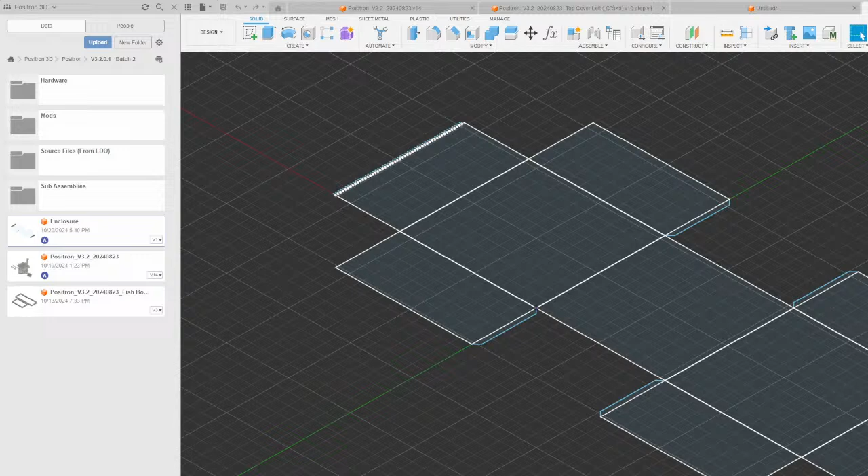I'm down in the corner! Ah, fear me! Alright, let me add a source here. No, we're not gonna do display capture. What do I want? You'd think I would have done this. Window capture, there we go. Alright, yeah, I'll just leave it as window capture. We're going to capture Fusion 360. There we go, hello, let's bring you down a bit, just above video games, there we go. Let's squeeze you down. There we go. All right. I think that fits, there we go. Yeah, there we go. Now you can see a few things here. I don't have the fancy border that I do when I'm on. We'll just offset it here. Yeah, we'll just offset it. Boom, right there. That way your chat isn't just covering up half of the screen. Someone give Nomad caffeine, did I yawn? I think we're good, oh someone gave Nomad caffeine. Okay, you need to make a Stranger Things upside down theme Positron, right? Negatron, I have it printing right side up. How is it possible that Nomad has gotten smaller? If you get much smaller, you'll be the size of an actual Positron.

Who knows? Alright, so here is something I've been working on - this is kind of an enclosure idea right now. I believe these are all equal sides, but for whatever reason, my brain is seeing this as a rectangle, not a square.

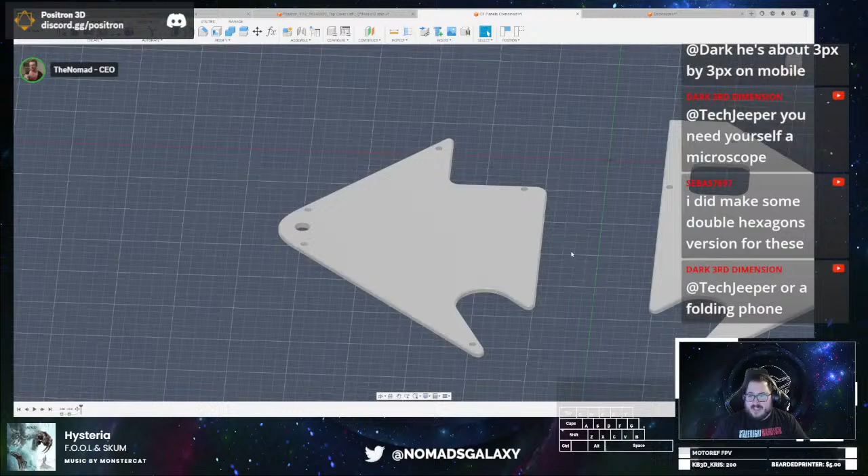Okay, so here's the challenge: we're going to have to actually design this upside down, because the way I'm thinking of doing this is printed like this onto, hopefully, a carbon fiber panel, so I can embed the carbon fiber texture. And then we're going to extrude the sigils into these materials here.

So let me look up a hex glyph generator—there's a generator for generating glyphs. Okay, that's pretty cool, but those are like really... oh, okay, hold on, we got some cool ones here. But not feeling it.

Glyph generator—nope. Magic spell generator—nope, that's an AI thing. I want something that... magic symbol generator, did I find it? By Psychic Science, hold on. I mean, that is kind of cool. Kind of. Ooh, found it, found it.

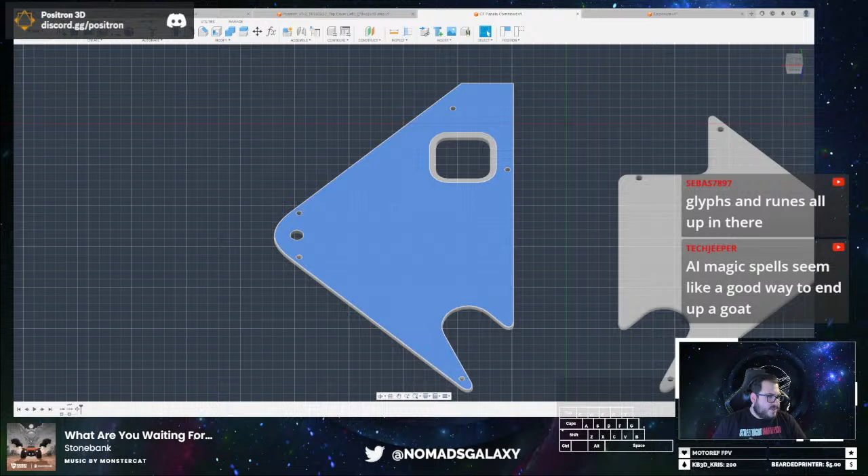Okay, so let me open up another browser capture here. Yeah, window capture, add a new one. And then, here we go. All right.

So I will post a link to what we're using here in just a second—this is a free tool that I just found. But it looks like... oh yeah, look at that guys, that is right up our alley. Oh yeah, some of these are fancy. I'm going to put this right underneath my face here.

Right? Something like the new God of War games. Now here's the problem—I don't know if I can export these. So we're literally going to have to take inspiration from these and redraw them. I'm fine with that. Additionally, I could look up...

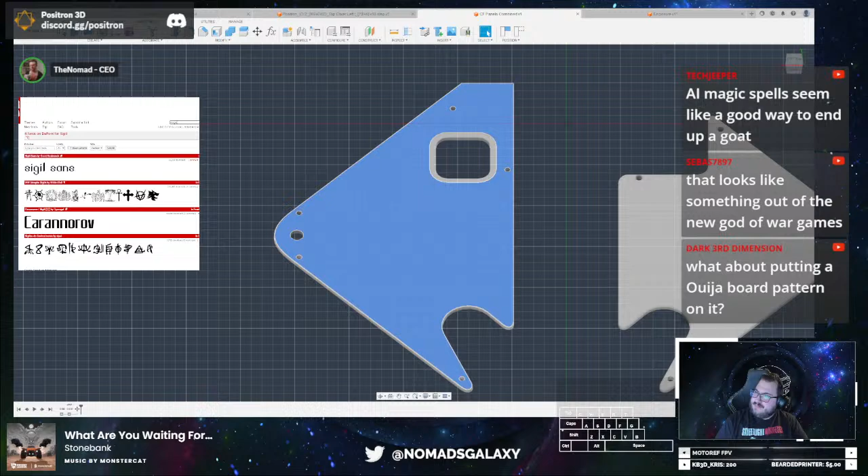So if we go to font, we can just search for like sigil—no, ooh. Oh, we searched up magic. Ha, some Halloween imagery. Okay, that's something else we could do, certainly.

Nah, that's a little too occult. So here's the thing: Ouija is not an occult thing, it's actually made by Hasbro. It's a board game—joke's on you, it's always been a board game. It was literally made during, like, I think it was made during the D&D scare.

These are absolutely some images that we could easily create with Fusion. Some of the really squiggly bits, probably not, but ones like this, oh, that'd be so easy to make.

So, oh, export as SVG! Holy shit! Okay, look at that. We can, ooh, hold up.

Okay, so we want this to be 0, yep. We want the sigil to be FFFFFF. Apply that. Okay, no glow. We want this to be... wait, why is it red? I don't understand how it became red.

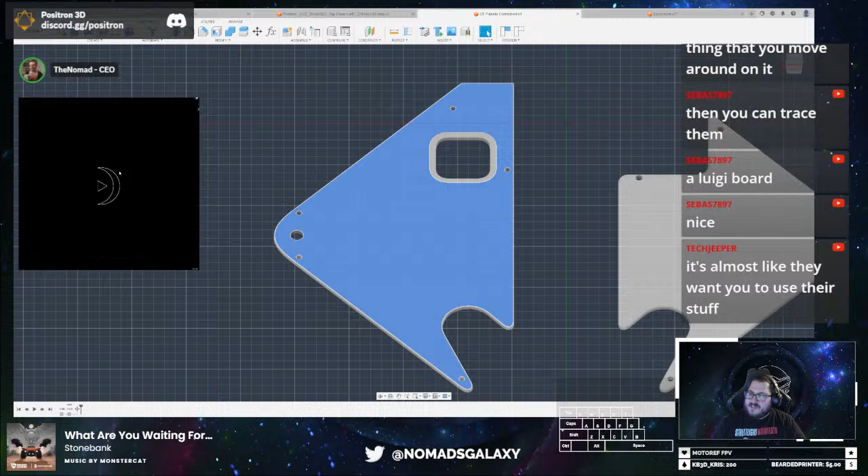So we're going to import this SVG. I'm worried... whoa, that's fancy. Okay, let's export this as SVG.

Let's clean up all of my downloads there. Okay, so let's see. Hey, Hedgehog, welcome! We are doing some fancy stuff here.

Okay, so let's do this. First, we need to make sure we capture design history. Is it already... yep, okay, cool. Already capturing design history, wonderful.

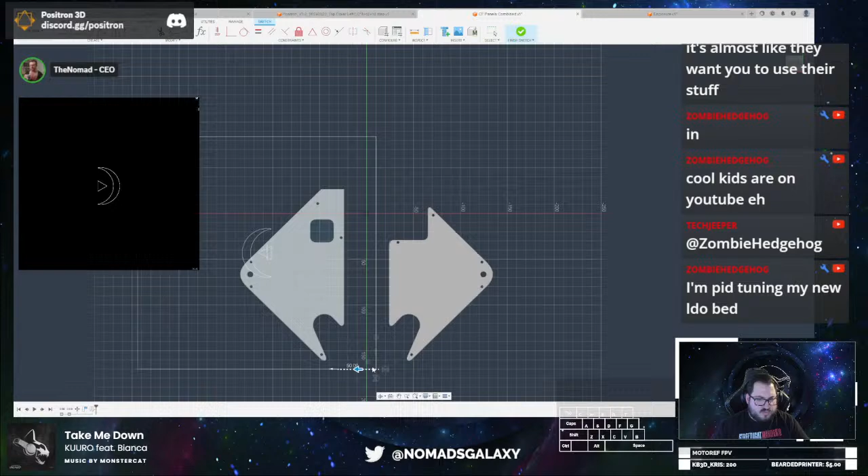Okay, let's see, I think we're going to scale it to 0.5. Yeah, there we go. Okay, that's scale. Oh no, I undid the import.

You guys are gonna learn really quickly, I am not good at Fusion. Like, I do things wrong.

Okay, here's what I'm thinking. I'm thinking 0.75. Oh, nope, didn't mean to actually import that just yet.

Had it a few days, but haven't had a chance to try it. I am excited to see what you do with it. I've been able to print ABS ASA on it without any issues myself, so I'm really excited to see what other people do.

All right, this is going to be a little close to the edge here. Okay, so let's make sure that's as centered as we want it to be. Let's bump it up 1.2. Yeah, right there. Okay.

Can barely see that. If we swap our environment, do you think we'll be able to see that better? Oh yeah, absolutely. We're going to go with Tranquility Blue for now.

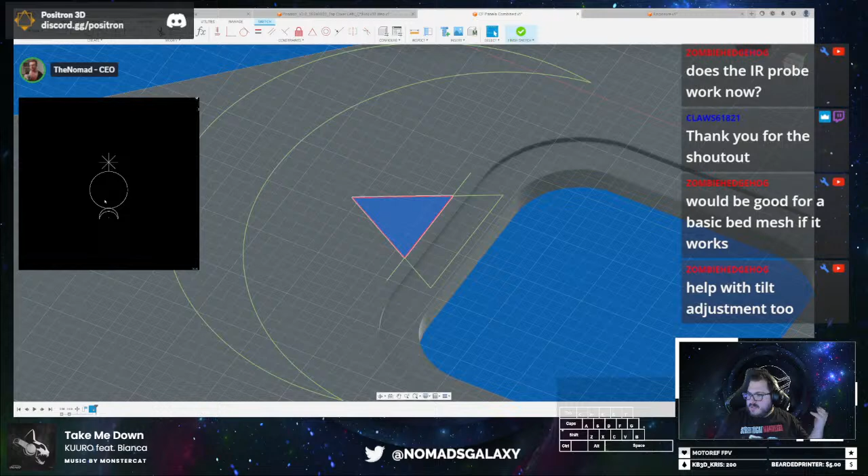Okay, so here's my idea: either we do the outline of the sigils, or do we fill the sigils? What do you guys think? I think we're gonna have to do outline, because some of these are like this with lines. Yeah, so we're just gonna do outline.

So let's select that, and then we're gonna do, I want to say, an offset of negative. Let's try 0.5. 7.5? Yeah, that's gonna be thick enough.

I like that. Outline might not glow enough. You're right, but I also just have a general... let's do an outline of 1 mil, I think that's gonna work, because this stuff is pretty bright when it glows. Like, it is bright.

Oh, that one's off. There we go.

Okay, that's our first sigil. I think that's going to look really cool right next to the IR sensor. So now we need something to accompany it.

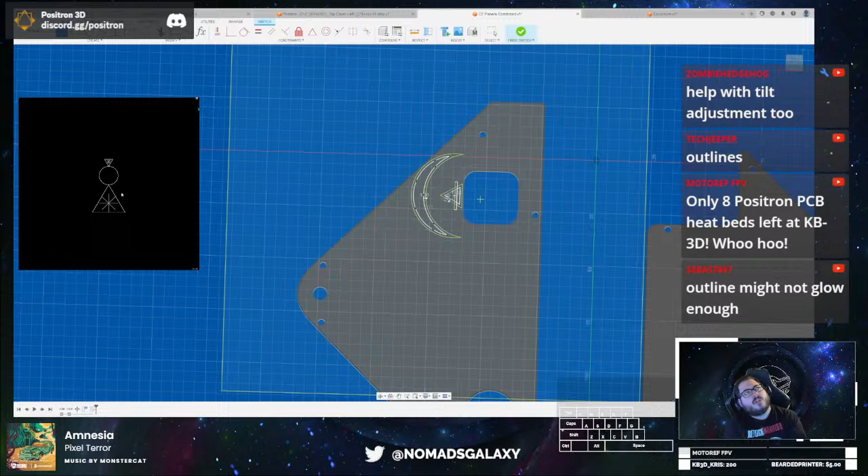Yeah, Zombie, you're right, it would help with a basic bed mesh and tilt adjustment. I mentioned it earlier, if you're in an environment near windows and stuff, it's not going to work great because of the infrared pollution from the sun. But if you're in a space with very little IR interference, you should be fine. I don't see why it would be too much of a problem. But you do have to re-enable the IR sensor in the config to do that. I don't think we've turned it off, I think we've disabled it for use as the Z-stop, but it should still be referenced in code.

Some of these are interesting, but I'm not really feeling them.

Massive shout out to Watabo. Let me post this link in our chat - that's the link to the amazing program we're using here to generate some of these sigils. Absolutely amazing what this person has done.

Let's do more simple, no, let's do this. Chat, if you can find a really cool sigil generator that would be useful. My brain wants to use all the ones with moons in them, but I can't use too many moons.

Ooh, okay, let's use this one. Export as an SVG. All right, so insert SVG. Okay, that one's gonna look pretty cool.

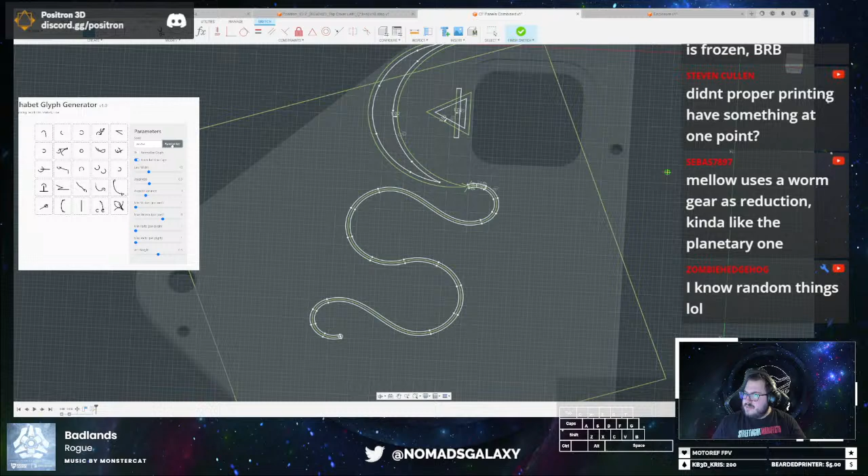Oh, hello, okay, can I export these? No? Aw, okay, line width, set to 10, let's randomize. A little too weird.

Hello, what if I hit start on this? Okay, it's doing a thing.

Welcome back, Claws, Mellow Cannon. Yes, that is what I said.

Does this just keep going forever? Hey, Nathan, what's up?

What? Hold on, it looks like no one can hear you. Give me a second. Let me pull up Discord here.

You probably will. Let's see, Discord PTB, go ahead and say something. Nope. Let me mute Monstercat here and turn on... Oh god, that's loud. I'm sorry for anyone who I just flashbanged their ears off.

I can hear you, it's in chat. Say something? Maybe your OBS is recording it weird? Well no, I'm on a different computer. Oh yeah, hold on, let me turn down Vivaldi a bit here. Okay, there we go, alright. Yep.

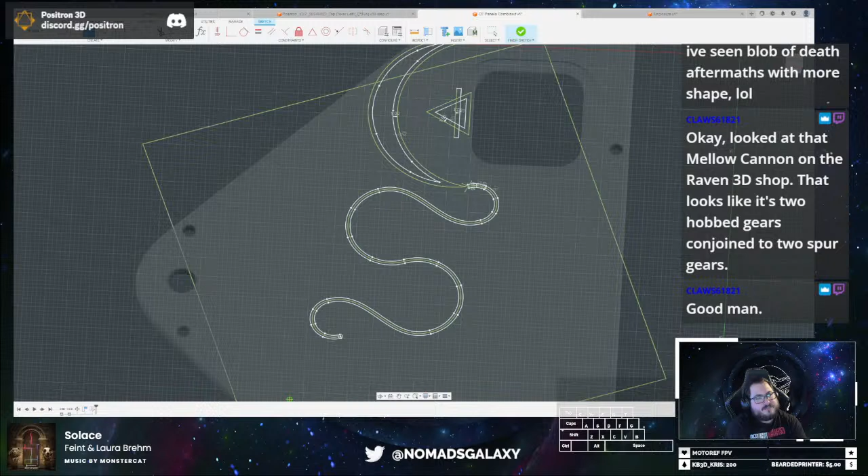Okay, looked at that mellow cannon on the Raven 3D shop. That looks like it's 2 hobbed gears conjoined to 2 spur gears. So you're thinking specifically a worm gear exclusively to push the filament itself? I don't think I've seen that. I don't see why it wouldn't work. I literally cannot think of why it wouldn't work.

It sounds decent. Why don't you use the image generator in Google Gemini? So I want something that's an SVG that I could just import, and if it doesn't do that, that's gonna be difficult.

I used to have one that was really good. Oh wait, here we go, hold on, I got another sigil generator. Is this... no, it's the same one we were just using.

Never mind. When the sheriffs were leaving, they said, if they come back tonight, you're going to use the flashlight, aren't you? And I said maybe. And he said, okay, next time we come out here, we'll wear the welding mask. Flashlight, oh yeah dude, they love it. Anytime somebody's missing or they have to look in the woods, they just stop by the house and I give it to them. But he said that when they come back, they'll wear their welding masks. I'm just sitting here like, that's not enough, guys.

Oh my god. AI-powered SVG generator, okay, I'm not... this doesn't feel great, but let's try it. Okay. Magic sigil.

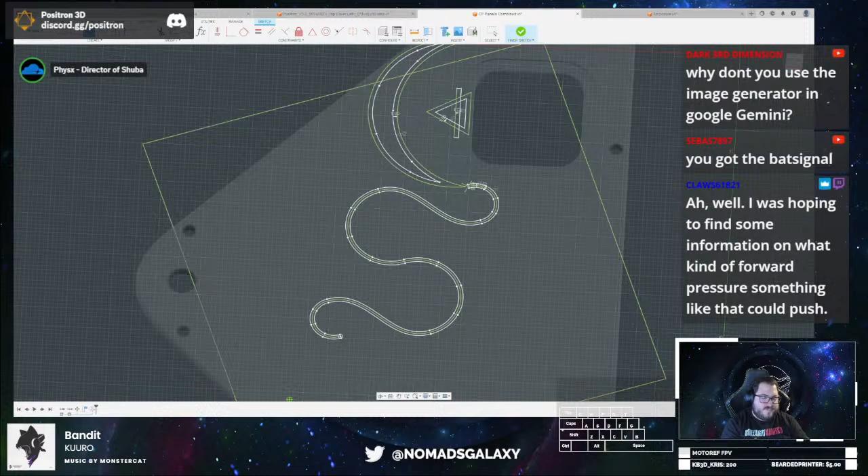For a little context about welding masks and the flashlight, I have a Shade 14 welding mask that is not auto-darkening. I can turn the flashlight on full power and walk around normally being able to see everything. A Shade 14, even in bright daylight, looking directly into the sun, looks like a little pinhole of light.

TechJeeper says, hey, we can hear. What can you hear? Can you hear me? Can you hear me now that I went famous on Twitter for one tweet? Never mind, I was like 5 minutes behind apparently. Oh, I used it up.

Man, it is difficult to find just like a generator that's not like... open an incognito window and do it again. Maybe. Okay, I still can't believe the single biggest tweet I have ever made was a meme from Facebook. No, we cannot hear you after you went famous on Twitter. Oh, Lord.

I calculated it out. Twitter pays like roughly $5 per 1,000 impressions on some topics. Whoa, really? Yeah, but that's for some topics with really big audiences. I would have got maybe a couple cents, and I would have ended up getting like $2.30 from this tweet. Now, if I could ever get famous enough where the income from paying for premium would pay for premium, I would do that, because then I'm not giving Elon any money. True, very true.

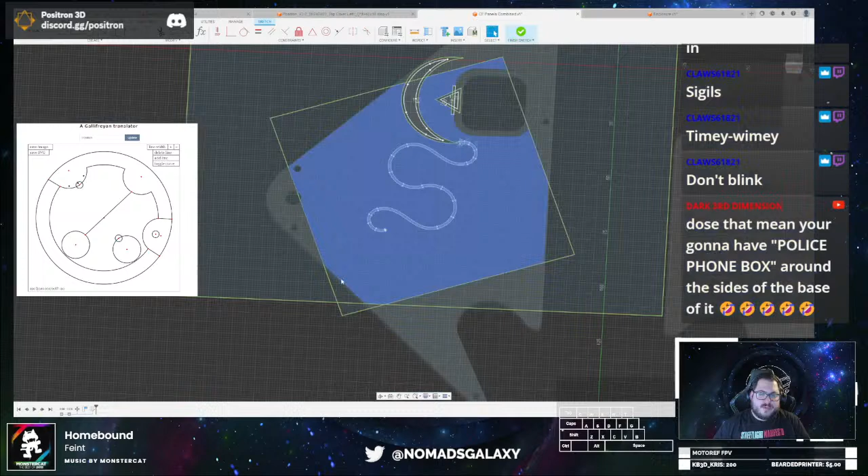CrashCtrls asks, what are you designing? Just joined in - we are designing. So let me zoom out a bit. So this - oh, did I just hit escape? Okay no, so these are top plates for a positron.

We are designing some glyphs and sigils to go on this, because what we're going to do is print this out of ABS and ASA, but the ABS that we're printing this out of is glow in the dark, so we're hoping it's going to shine through the panels when exposed to UV light. So that's what we're doing, chat.

What color of ASA are you going to have on top of the glow? Purple. By Polytech, are we going to do a Polymaker test print? No, it's actually going to be Midnight Meteorite from Ambrosia. I have no clue how transparent their filament is, but with ABS and ASA, some companies really crank up that pigment, and it could be...

I would say don't hope for the test print to be successful, because it probably won't be. I'm thinking like a 1-layer difference for the interface layer. Well, actually, what are you doing the layer on the outside for? It's just to make it look more purple. I would use adaptive layer height. So is it going to be on a top surface or on a wall?

Wall. You'll see, once I get this a little bit done. Alright, I think I'm just going to leave it kind of generated like this and not mess with it too much.

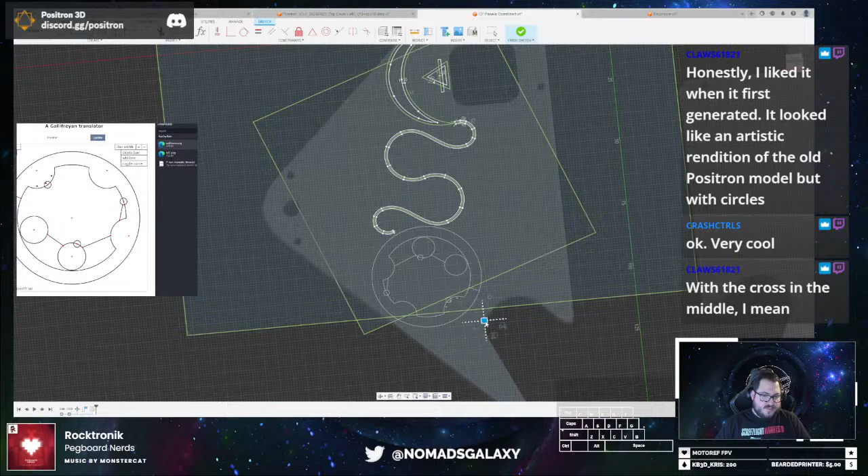Into Imalent Fusion. Imalent is coming out with a UV flashlight. Cool. And it's going to be 100,000 lumens of UV light. Oh my god, of course it is. If this doesn't work, we can charge it up with that.

Yeah, I sent the color pictures to the side chat. Oh, they're so good. If they offered this in ABS or ASA, I would do a Positron in it. It'd be called the Mocha-tron.

Honestly, I liked it when it first generated. It looked like an artistic rendition of the old Positron model, but with circles. Potentially, yeah. I'm still trying to figure out what I like about this. I'm very picky.

This is going to be difficult to do because this Gallifreyan uses a lot of lines. So being able to etch Gallifreyan correctly is going to be really difficult. So I'm going to be taking some liberties here.

Oh, that one didn't take. That's weird.

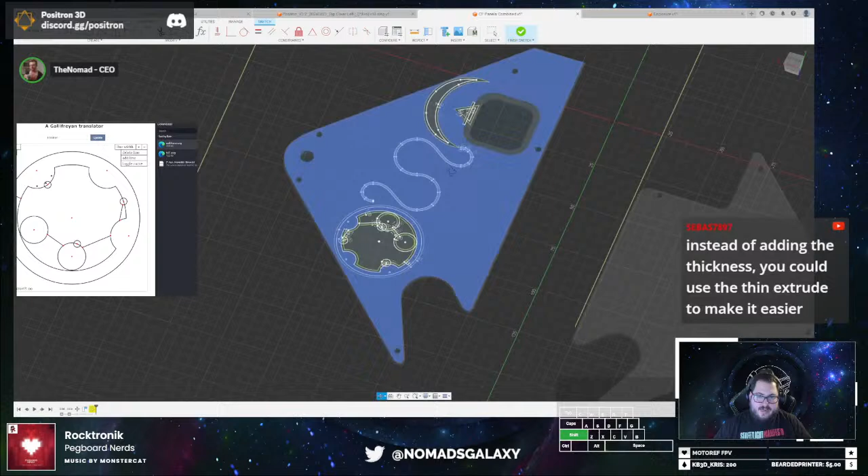Alright, I like that. I am liking that. I want to add some other sigils in here. So, like...

No, why is the Google image effect using a domain that just says Asian box? I'm sorry, what? Yeah... asianbox-pa.googleapis.com.

Oh, that is mana. That is not... that's Magic the Gathering symbols. I don't want a Magic the Gathering symbol.

I'm stupid, come on. I'm so stupid, Sigil. Nomad. What? I was reading it so wrong, it's weird, because I am slightly dyslexic, and it's AI Sandbox. Oh my god, 10 out of 10. Not Asian Motor Rev box.

Let's see what happens if I hit create sigil here.

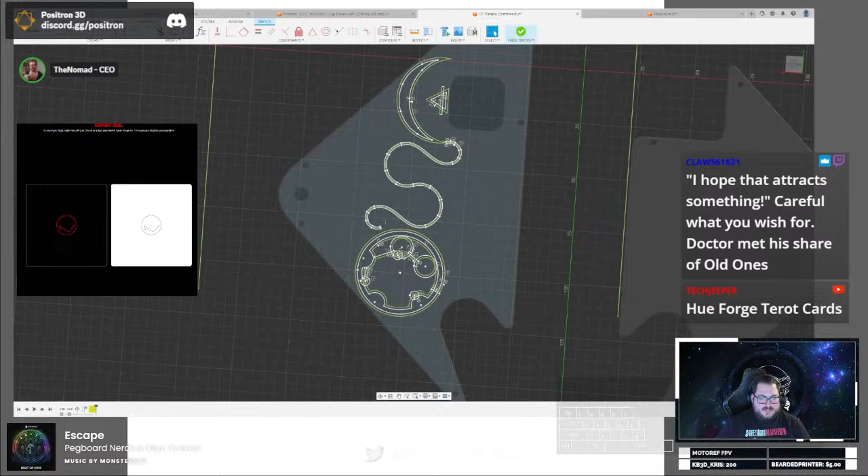And insert SVG. And it is a bit big, so we'll shrink it down. So we're gonna do 0.75. No, 0.5. No, it looks like we're gonna want to do 0.75.

Alright, and then let's create a new sigil. Let's do Nomad. This is a neat tool, I like this tool. Huh, HueForge Tarot cards would be pretty cool. Okay, Nomad is a simple shape, let's do something else, let's try Nomad's Galaxy.

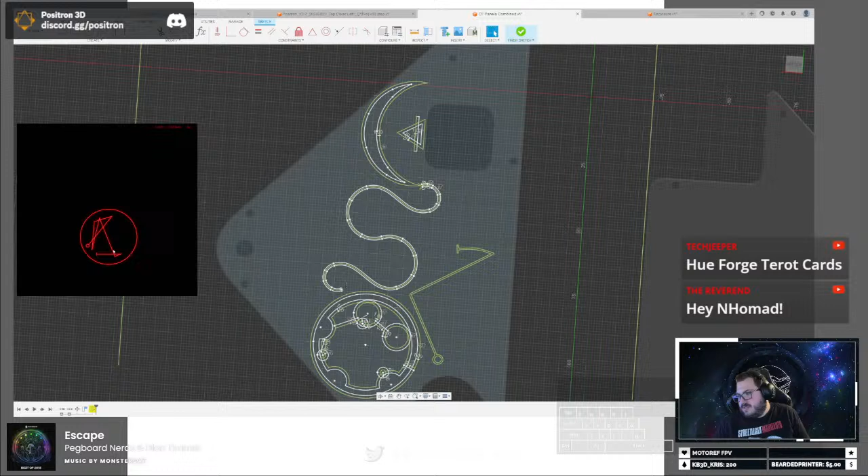Hey Reverend, welcome. And that's kind of complex. Let's try Nomad Gal. We're doing good, we're doing a fun little design stream today.

Okay, I like that one. But now let's try Nomad's Galaxy again. Nomad's Galaxy. You know what, I'm down with that one. I'm down with this one.

Alright, so same as before, save as, and then we're just going to replace the previous one. Then back into Illustrator. File, open recent file, download. No, not SVG. Open recent file, download PNG.

Hit no. Nope, that's SVG again. Okay, there we go. So once again, we go image trace, and then we're gonna try sketch to art.

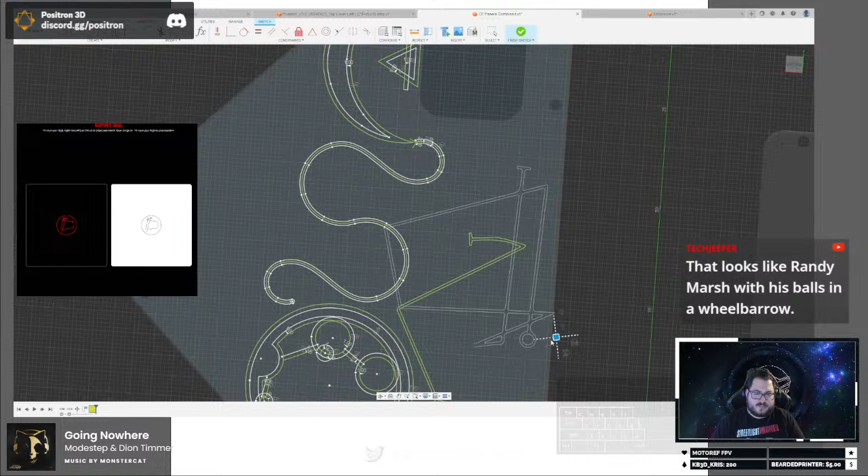I'm liking this, I'm liking the combination that we're going with here.

All right chat, who wants to be a sigil on this attempt at something pretty cool? Obviously only going to do this with you guys, with your permission. So who wants to become a sigil? We'll type your name into the generator and let's see what happens. Think you're gonna tap out for this?

All right, Claus, thank you for stopping in, thank you for the follow, I do appreciate that. All right, Dark Third Dimension, let's try your entire thing. Dark Third Dimension, let's see what happens here.

Ooh, okay, I like it, I like it. Let's do that one, that looks good. We'll get to someone next after this. I see a perfect spot for this sigil here.

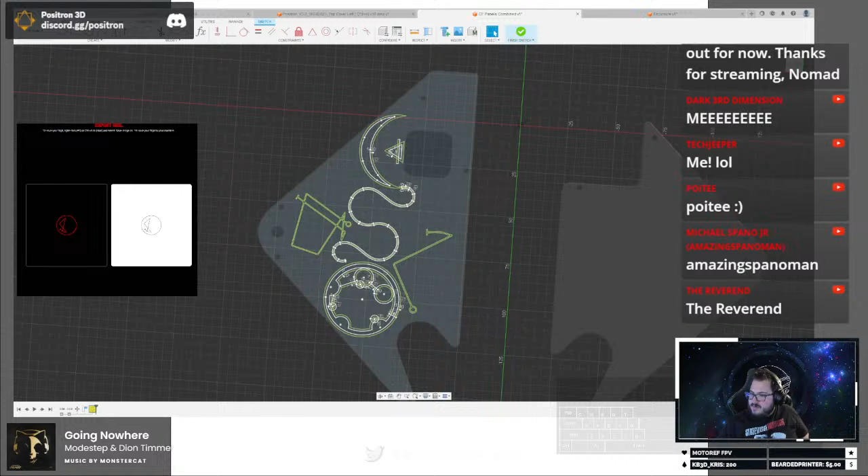I just need to close out the PNG in Illustrator. There we go, yep, replace it. And then we're going to open recent file, PNG. There we go.

Yeah, so if you have Adobe Illustrator, this is typically how you can actually make... actually, let's do line art, see what that does. Nope, don't like that one. All right, image trace, sketch to art, high fidelity.

So this is actually how you can... what's it called... generate stuff. Wait, is the game stream actually capturing this? Yeah, it is, okay.

It was, at least for a moment there, actually capturing it as a game. That's kind of cool.

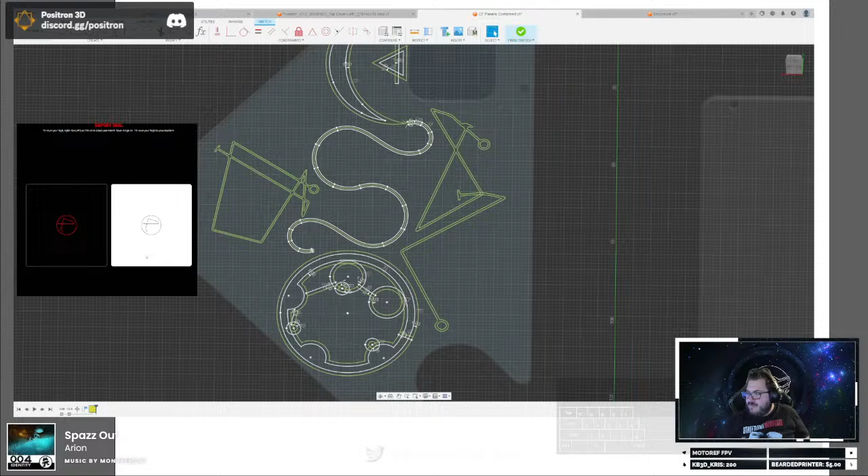All right, let me close out, download a PNG here. Yes, file, open recent file, PNG.

Let's see what that generates. Oh, I forgot to expand. Dude.

All right, export. Actually, before we do that one, I want to try a longer name of my own pick real quick. Yeah, we're designing this not knowing at all if this is going to work, but I trust my Prusa XL to do a good job on this.

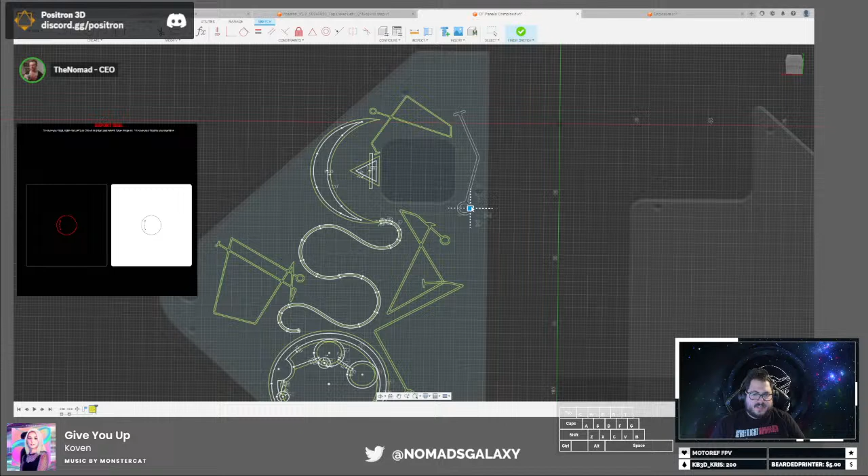Oh, that is not what I wanted. What happened here? Oh, I forgot to hit OK on the export. All right, insert SVG. So apparently this sigil means Voron, which I'm just going to shove right there. I feel like that's good.

Alright, let's generate a new one. Let's see. Fuck it, let's do my favorite band. See what happens. If you don't know, my favorite band is Streetlight Manifesto. We all know the truth, we all know it's Asking Alexandria. Okay, that is way too complicated. It's cool, but it would take up a lot of space. So let's try... Nope, oh god no no no no.

Ska bands. The next sigil you do, you need to do one where it's just a bunch of random letters, like a cat walk on your keyboard. Yeah, I'm not a fan of the ska band sigil here. Then do the cat keyboard sigil. There you go. Oh god, this is gonna be massive. Or not. Yeah, that's just a squiggle. What can you expect from a cat on a keyboard? Right, okay let's see what else. You're expecting too highly of a cat on a keyboard.

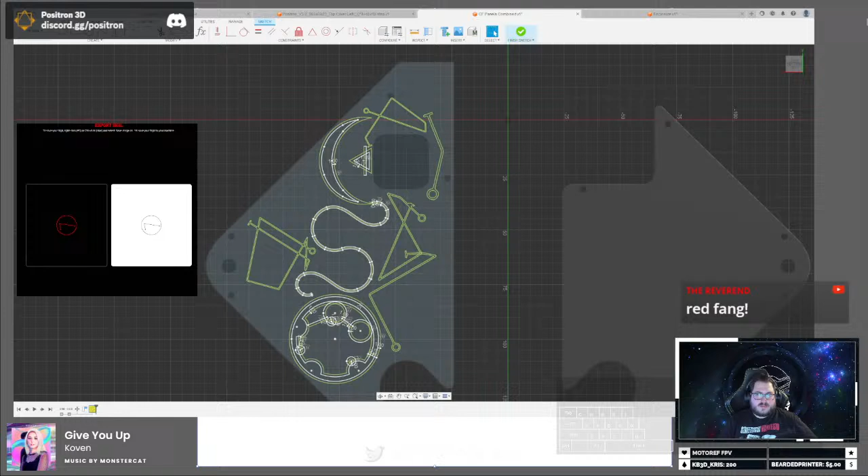Alright, then we're going to image trace, sketch to art, expand, delete the circle, okay, and then export as, download the SVG, yes. Okay, alright, this, we'll do one more after this to kind of fill up that void in that bottom right section.

This one's a bit larger than I thought it would be, but it fits right there. Okay, there we go.

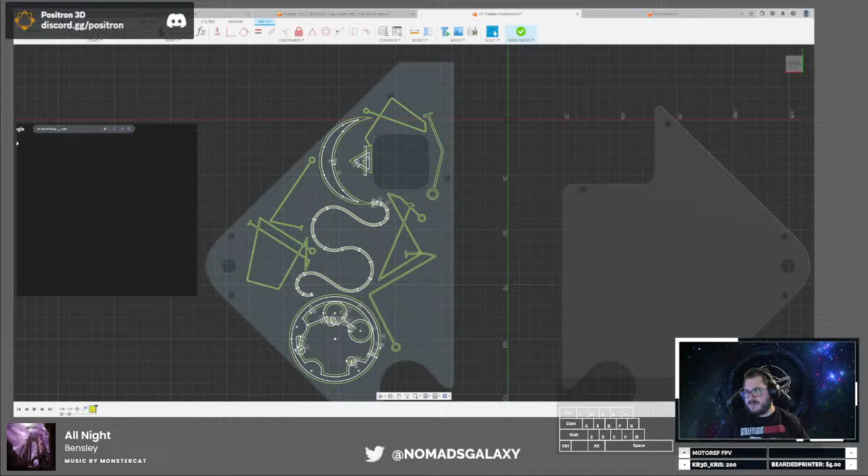Oh no, did I really just think of that? Yeah, I did. What did you do? You broke something, didn't you? One second.

Alright, copy image. I think chat knows what I'm doing here.

Oh! I look back at my computer and I see it. No, guys, it's great, it's funny. Alright, copy, good, alright, let's see if this works.

We're gonna turn that off, just gonna dump it in here. Yeah, okay cool, cool, it grabbed it. Cool. Alright, properties, image trace, sketch art. It worked perfectly. Expand. We're gonna delete that.

Okay, I guess we're doing sigils now. I guess we're doing sigils now. I guess we're doing line arts now.

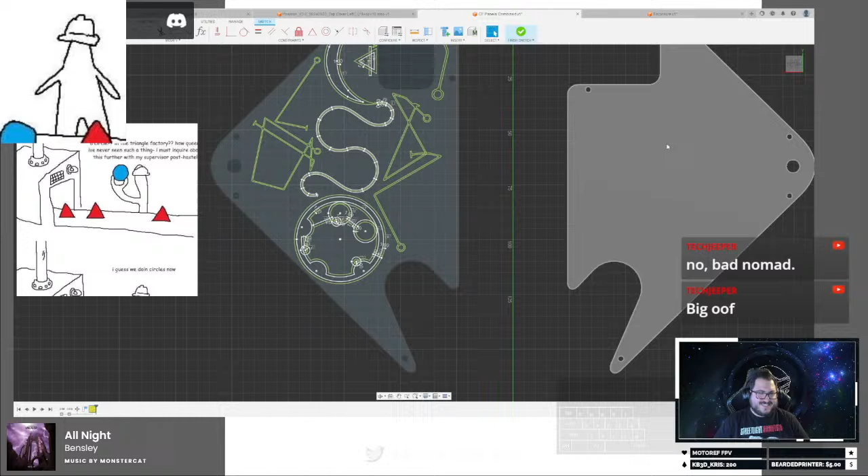Oh my god, oh my god, oh my god. Chat. Chat. It fits, it fits chat, it fits. Oh my god, it fits. Oh no.

Alright, I feel like we need maybe 2 more, like to fill this void here and maybe down here. That's what I'm thinking, maybe even up here. I'm trying to think of what to do. You know what, fuck it.

Someone already made it an SVG. These wonderful bastards. These wonderful, wonderful bastards.

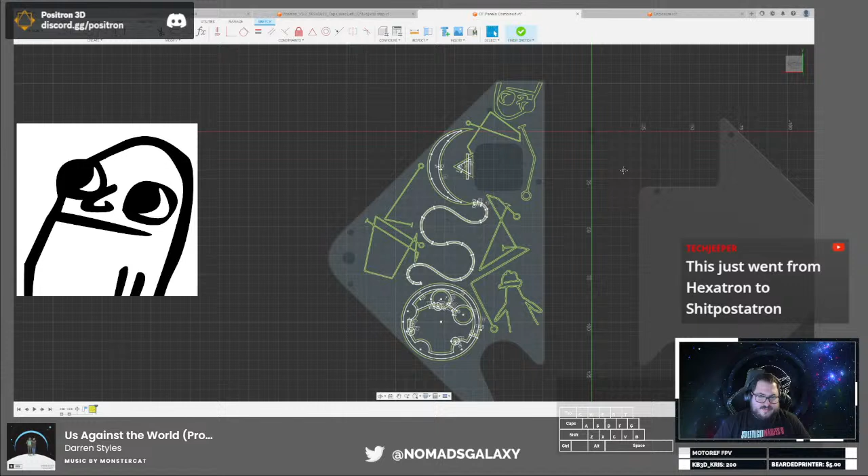I feel like this should now be called the Shitpostatron, because there's astral star gazing stuff in here, and then suddenly it's shit posting. And then, let's see - don't print on planes.

Oh, so you want to know something really funny about what happened with my sister? She came into my mini fridge in the garage and grabbed 2 Cokes out of it without asking me. And the 2 Cokes she grabbed were from the top freezer part, where I was getting them to chill down really quick and forgot about them. So when she opened them up in her car, they most likely exploded.

Sorry, my parents are smelling something smoking. No, they smell something burning.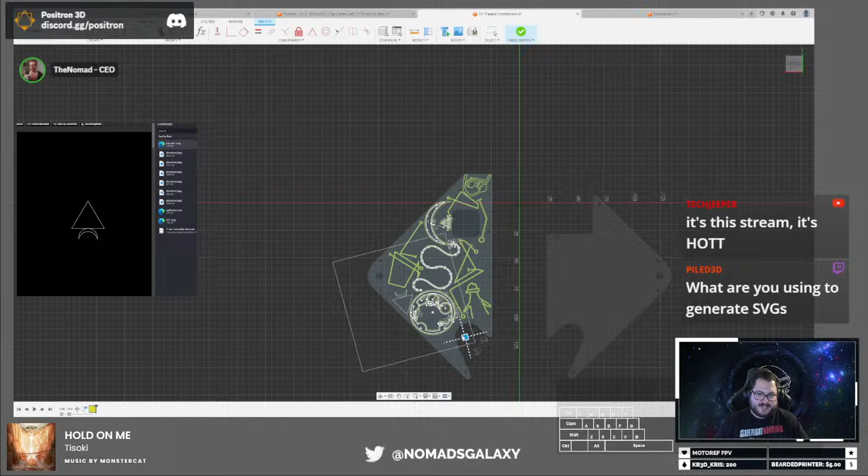What are you using to generate SVGs? I'm using Adobe Illustrator, that's what it's called, for image-based SVGs. For the sigil-based SVGs, it is this - I linked it earlier, but I'll link it again here. It is a sigil generator, and you can right-click and just export it as a sigil.

Do 0.5 on that, and then 1 on that. Resin is toxic - yes, yes it is, my friends.

Okay, let's finish the sketch and actually do some extruding here. Okay, so we want this to go... so let's start with dick butt, because that's going to be the easiest one for us to extrude real quick.

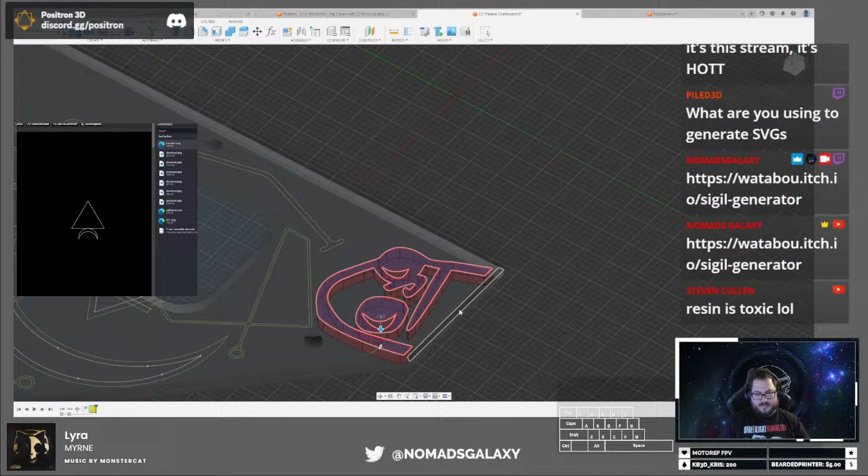So let's extrude that. Okay, so we need to do - since we're using a 0.4 nozzle, we're going to use 0.2 millimeter layer heights. So let's do this plus 0.2. And just like that, we've extruded the hollow portion of this.

But now here's the trick, right? We need to re-show that sketch and then re-extrude that. Now we hide the sketch, and then we do new body. So now it's 2 bodies in this mesh here.

And we're going to be pretty much doing that for the rest of these, because what that will let me do, once I import this into either Orca Slicer or Prusa Slicer, is set that object we just generated as its own color. So that will hopefully allow us to do what we want to do here. Pretty neat, huh?

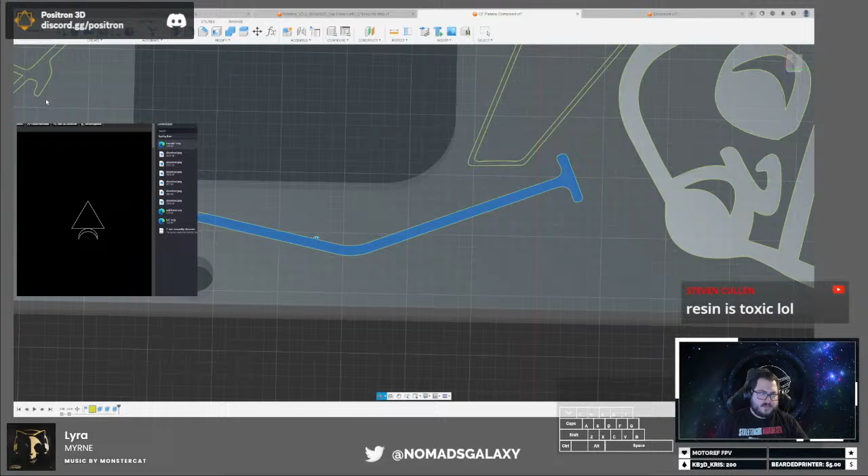Alright, now this one's going to be a little tricky, because I gotta do this in 2 different spots. So we extrude this down - yep, down to there - new body.

And then show that sketch again, so I gotta do this like 2-fold here. So we extrude that down, just like that. Now we're gonna hide that body so it's joined.

Now we're gonna go back to the sketch here and extrude back. Oop, nope, not there.

Just as a heads up, your stream may lag - you kind of just went all robotic-y. Yes. Oh, nope, we're good, alright, now you're back to normal. Yeah, what that was, it was my VoiceMeeter deciding to kill itself.

It didn't - YouTube and Twitch, it did not kill itself, it just took a nap permanently. Seppuku.

Okay, so this is going to be a very time-consuming process. Though, actually, hold on - I could definitely make this a lot easier on myself.

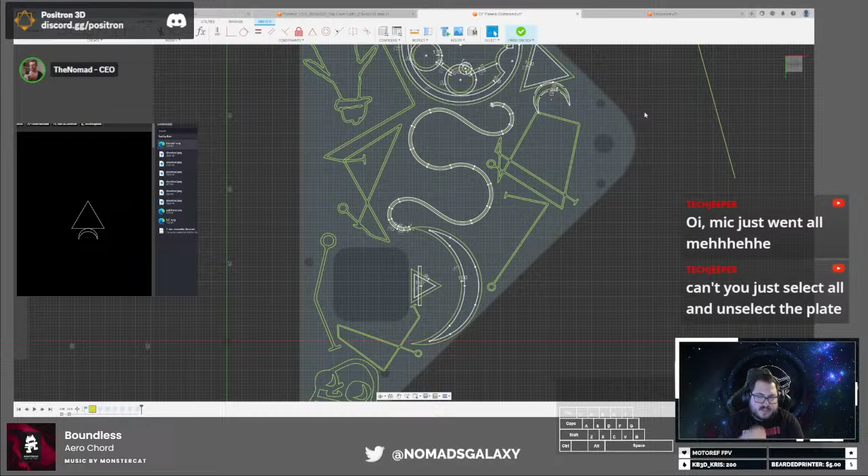No, I didn't know Prusa sold Raspberry Pies. Raspberry Pies? Pies, Raspberry Pies. And they have a Pi 4B and a Pi Zero.

Alright, so yeah, the downside to doing this is I have to go in and unselect the things that we don't want this to affect.

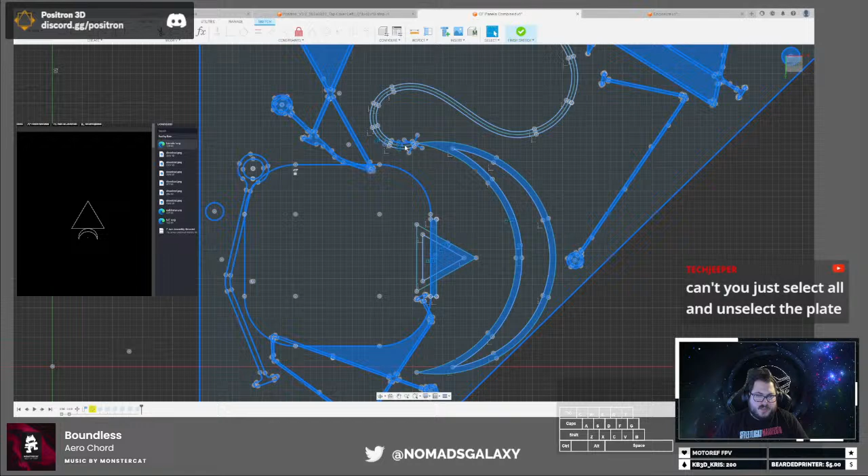And that can be a lot. I also have to unselect the ones I've already done. Oh, that path that we generated here, it's broken. That doesn't look good.

Before we go all in on this, I think what I'm going to do is export this small section, and we're going to see how well that prints. I think that's actually a smart idea if I do it that way. So we're going to just save this.

Oh, hey Lulu. Apparently Lulu's down here with us. Yeah, we're going to start with Dick Butt, and we're going to see how well that works, and then from there we'll figure out.

I am probably going to just send this canvas to some of my artist friends and be like, hey, I will pay you to draw a ton of magical glyphs on this. Take some of the fun mushrooms and get to work. Right?

Alright, save as mesh. Interesting.

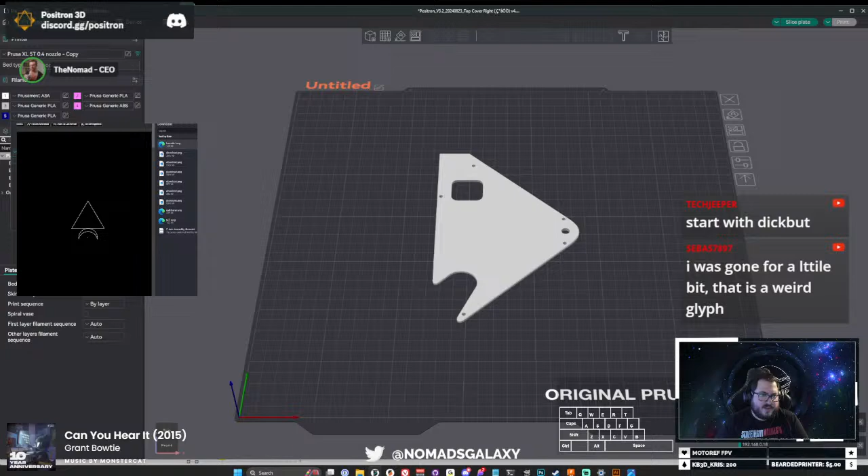Okay, now what we're going to do here is we are going to cut... no, don't. Okay. Cut. There we go. I'll just delete that for now.

Okay, looks like we need to assemble that. This is going to be a very quick print considering it's so tiny.

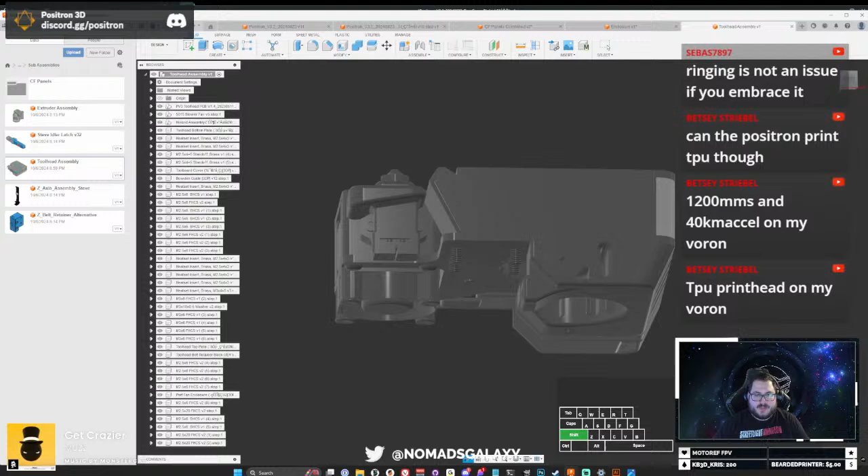Let's close out some of these. Go ahead and save. Yep. This is starting to lag my computer. Don't you just love it when it does that? Just freaks out. Come on. Oh, is it? Oh, it's responding. Okay. There we go. Still a little laggy, but this is fine.

Okay, so what we have to update here. So this is using the old fan duct, so we gotta install the new fan duct. So let's remove that, and let's remove that. Now what's neat is that the CAD already has half of the fan removed, which I just find hilarious. Okay, let's swap the environment here so we can see this a little bit better. That's certainly better.

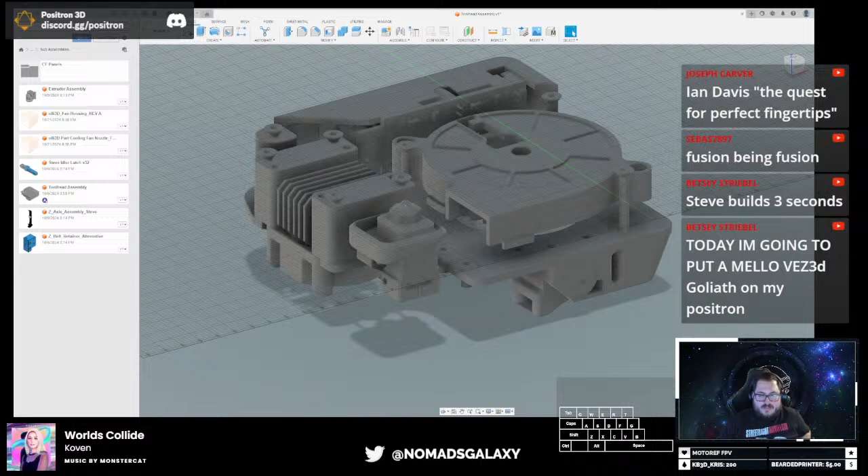Oh my god, what did you send me? Look at the picture, and then look at the comments. I saw both. Wish I hadn't. Alright, there we go.

So that is now imported, so let's bring this into the model. Okay, so here is what we're going to do. We should be able to line up one of these holes with one of the ones on the actual assembly. So that will snap this to that.

So we should be able to click assemble here. And then what we're going to do is on the bottom side, we're going to grab the center of that hole there. Oh, one second, my phone's going off. Okay, center of that hole there. Now we're going to go over to this assembly.

All right, Betsy, have a good night.

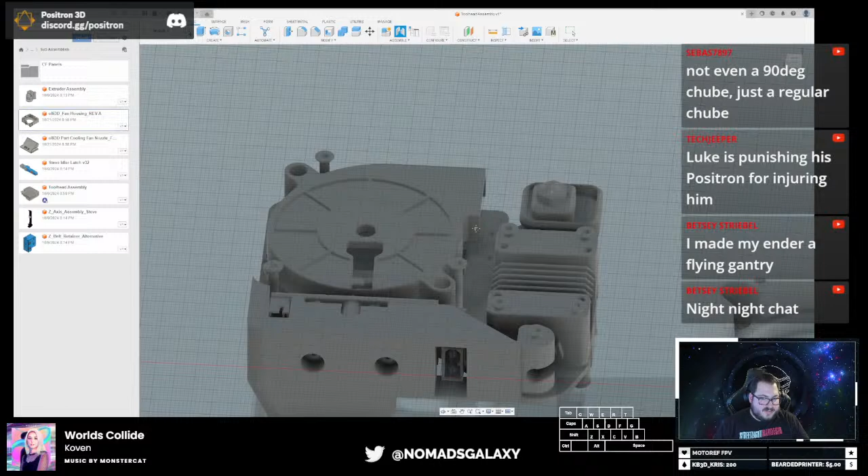We're going to do right there. And bam, perfect placement, absolutely no notes. That is exactly where it goes.

Now we bring in the fan duct. Now we got to rotate this to be correct. So rotate it 90 that way. And 90 that way. And now let's drag it over. Oh, did I? Oh yeah, that was way too far. There we go.

This is where you just need a good pair of VR goggles and like a couple of controllers. Honestly, yeah. Sadly, I don't have my goggles set up. Instead of dragging it 37 different ways with a mouse, you just grab it in space and yeet it to where you need it. Yeah, just clip it together like Lego.

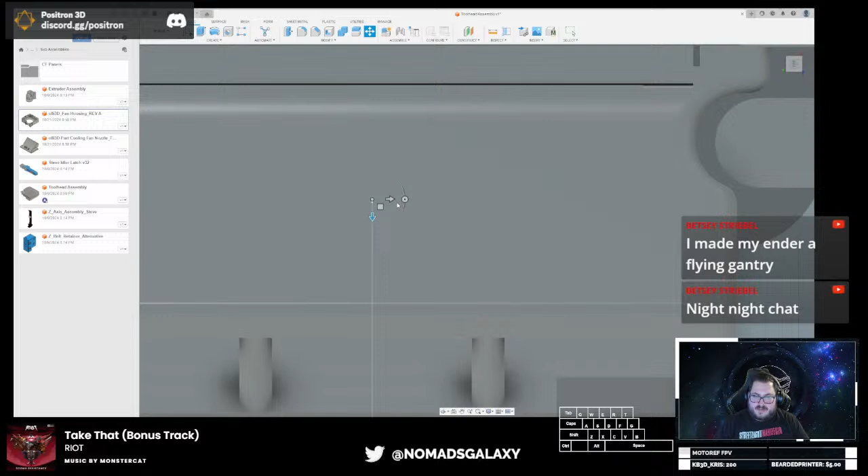Alright, that's close enough, I feel. Like doing a giant Positron build in VR where everything clicks together like Lego would be fun. Oh my god, it would be so fun.

That's a cool way to do a fan duct. Yeah, so the nice part about this design is that if we change the actual duct here, then we can actually just swap it out. So you don't have to redo this whole thing. I really like how Ollie did that because it's a pain in the ass to redo all that wiring. So if you could just pop this out and replace it, that makes everything so much easier.

But yeah, so now we just go ahead and put the top plate back on. Boom, we've just updated our tool head assembly, just like that. Yeah, and you could also do an accent. That's actually what we do.

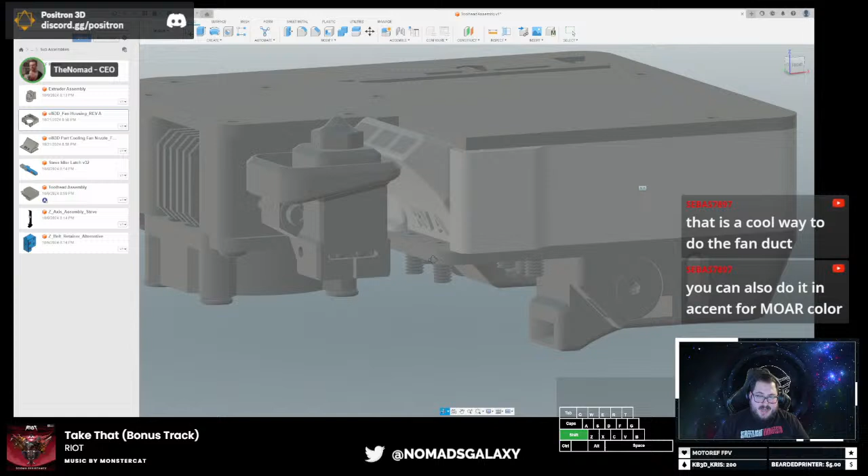All right, so chat, I have to do something here. I have to design a mount for, if we go back to Positron here. All right, so let's save this. Yep. So this is something I said that we'd do today. So I got to figure out how to get this to work.

All right, so I have to figure out some way to mount this that is somewhat dependable, potentially removable. I would like to be able to remove this when you don't need it. But we got to figure that out.

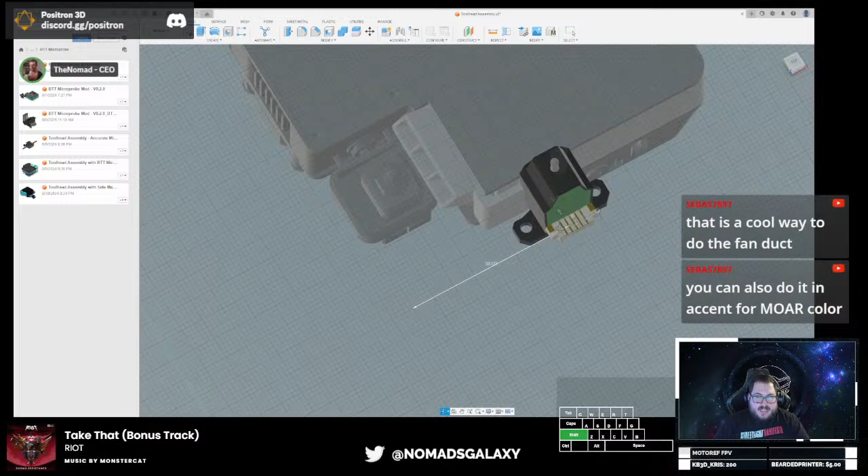The other challenge is that we need it to be as close to the nozzle as possible. I'm not sure how we're going to do that.

There is another design I did. In fact, let me see if I still have it here. So this was an earlier design I did, if it will load.

So this is an earlier design I did where we used magnets to just clip into place, just like that. And this worked. The only problem is printing this in ABS or ASA was near impossible. So I don't think I'm going to go with that design now, because it was just near impossible to print that out of ABS ASA in such a way that it wouldn't break.

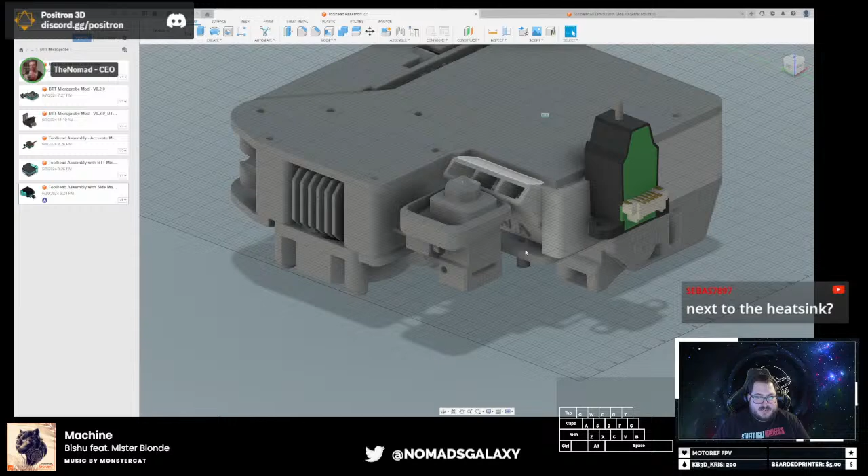Go back to here, I'm trying to think of a way. Actually... no, that's too small. Oh, actually, hold on. That's a whole millimeter right there. Damn, that right there is a whole millimeter in that gap.

You don't need a lot of strength to mount a microprobe. You only need something that can hold it there. It taps against the thing, and then you remove it. That's all you need. This does not need to be a permanent addition to the printer. It's 1 millimeter. What about just making a magnet then? We tried that.

Well, so here's the thing, Sebas. When we're talking about the positron, one whole millimeter is a big deal. Because let's pull up the actual CAD here, and I'll show you just how little tolerance we have on some parts.

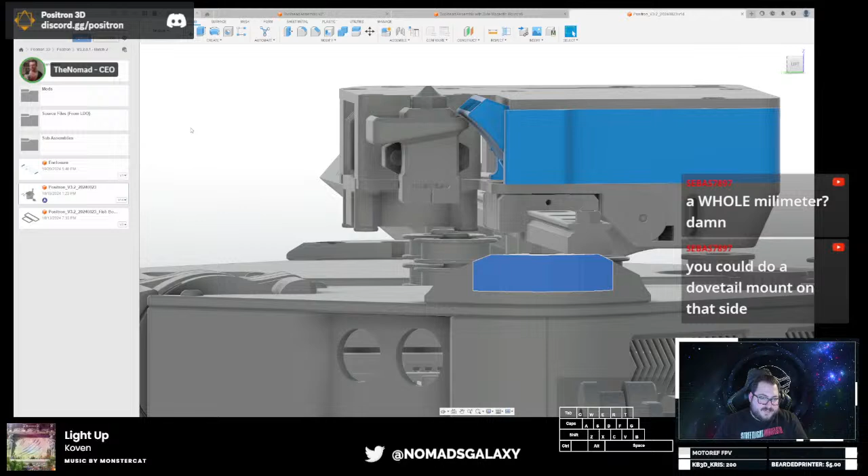Okay, see this? That is the side view of our assembly. I want you to guess how many millimeters are between those two screws. I want you to guess. Good, guess.

0.5? Okay, so we got a guess of 0.5. Chat, what do you think is the gap between those? 2.5? Okay, so we got 2.5. So someone's guessing 2.5 mil, someone's guessing 0.5 mil. About tree fitty, okay, so we got tree fitty. Dark Third Dimension says 0.25. Wow, this is a range. We are getting one hell of a range here. Very interesting.

If I had the CAD downloaded, I would literally go measure. Yeah, I know, but guess what? You don't, because you got it right. Oh, yeah, that is 0.5 millimeters of space between these two points.

0.5. When I tell you just how much tolerance the positron requires, it is insane that people are able to build these printers as reliably as they are, considering how little tolerance we have for mistakes.

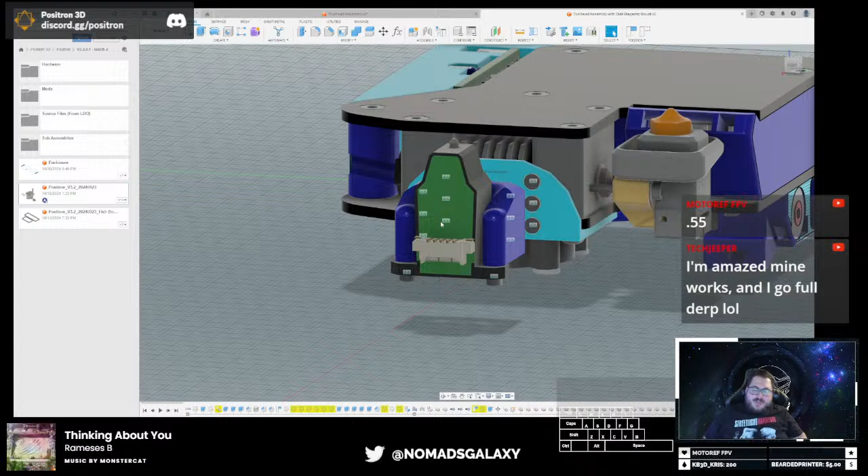So, if we go back to this model here, this original mount, this entire edge right there, that is 1.2 millimeters. That's all I had to work with in order to avoid collision with the extruder. 1.2 millimeters, that's all I had to work with. I could not go any larger.

These magnets here, these are the thinnest magnets I could find. It says a radius of 1.5, so it's a 1.5 radius. I'm trying to find the depth. Here we go, with a depth of 1. That's a 1 millimeter magnet. It's tiny.

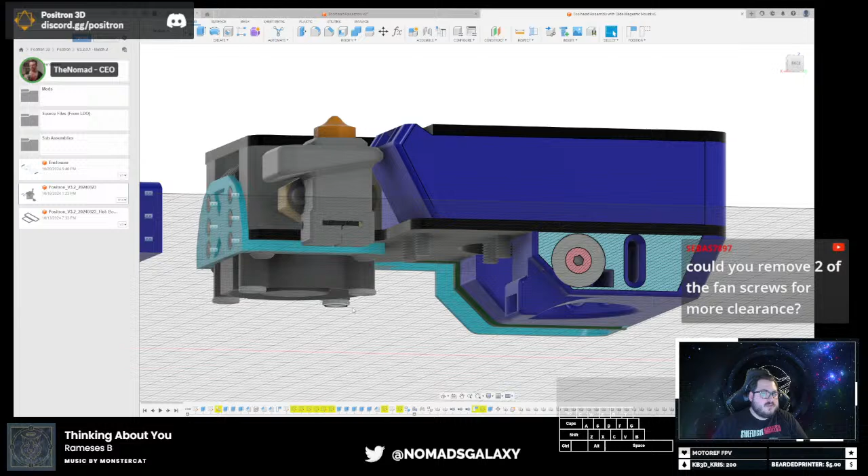It is microscopic. Could you remove 2 of the fan screws for more clearance? Yeah, you could technically remove those 2 fan screws for more clearance on the gantry, but then you also kind of risk it just dangling a bit if it's not mounted correctly. So there are choices you can make. One thing I recommend if these are ever colliding is remove one of the 0.5 mil washers, and then you get a whole 0.5 mil from the other screws.

So on this assembly, we have a whole millimeter right there. That's enough for us to make a little hook that just goes in there. That's certainly enough, but then we're not accounting for any clearance issues from shrinkage of this printed part. That's really hard to account for. But what we could do is a little clip mechanism that just cuts in here. So you know what, let's do this.

Let's do that. Let's get rid of that microprobe for right now. Okay, so let's look at this. This is not uniform down the entire length. Okay.

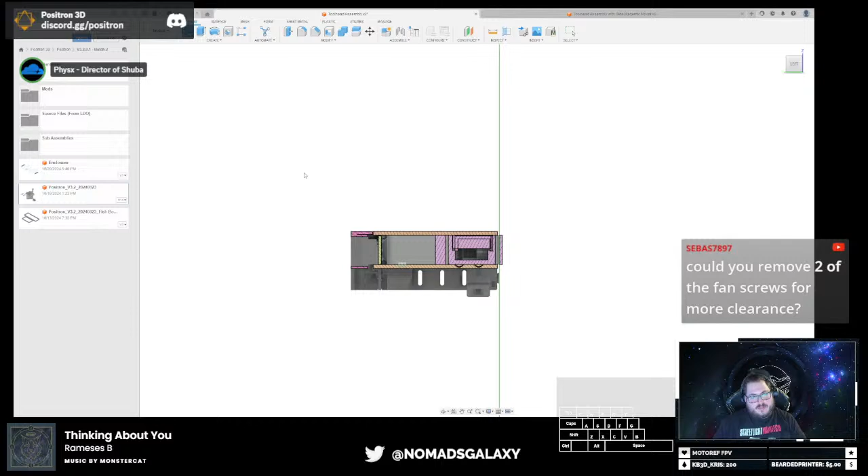Is there enough space inside the fan shroud to cut out a hole for a small hook to go into? Not really, because what I was thinking is if we could get it to hook in there, it really all needs to be stable left and right and down so it doesn't fall out. We don't have to worry about it coming back upwards. We could do that and have a magnet off to the side of the bed that just goes over, picks it up off the extruder, and you start printing without the probe. And we could attach that magnet to one of the bed arms.

What about deburring the screw hole in the fan housing and using those bolts with a conical head? Maybe. The problem is deburring that hole - either the user does it or the factory does it. We're trying to keep costs down, so that would probably be a user thing. If a user's having issues with it, that's just something they could do with a deburring tool. If they're careful, they can do it with a deburring tool. If you really want to get into it, a small step bit, just whoop, and you're done.

So here's my idea. Let me show you another thing that I did with the main CAD. This is going to hate me for opening and closing the CAD so much.

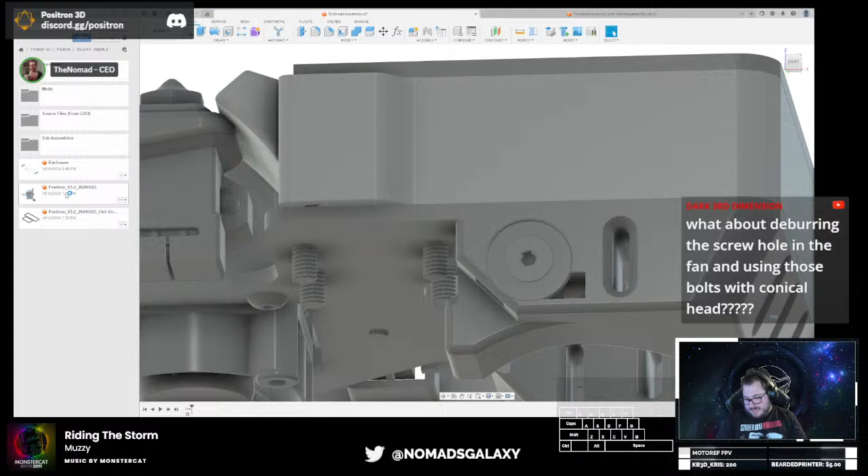Oh, you good, Nomad? Voicemeeter, Voicemeeter. What the fuck happened there? Wait, you thought that was actually Voicemeeter? That was me, I made that noise. I really don't understand what you're talking about. Okay, now I know you're fucking with me. It's not hard to do that. Well, no, your voice went quiet and controlled all of a sudden, breathing, and your voice actually went robotic. Then you started fucking with me.

Yep. All right, so if we look at the z-axis column right here, you'll see this little blue piece. In our CAD here, what we're starting to do is all the gray parts are what is staying the same, and colored parts are what we are changing.

So you could see here - isn't that gray a color? Isn't gray a color? Whatever. But the blue parts are what we're adding. The blue and orange parts are what we're adding. So this is going to be the official CAD soon. So we will be implementing SteveBuilds' new latch and belt tensioner.

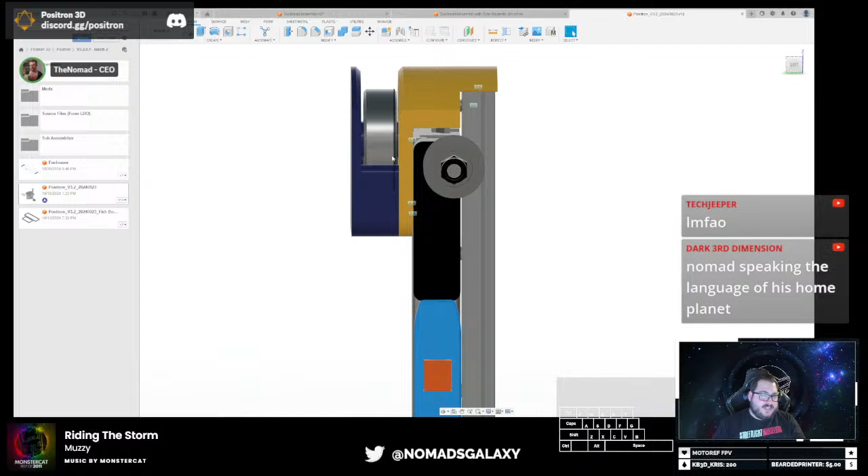If you want to do this for your current setup, it's actually a mod that you can download. This is just a skateboard bearing, so if you have skateboard bearings laying around, you can make this. It uses parts from the kit.

So you should have enough spare parts to make that. But anyway, here is a shim that I made. This shim goes between the carriage and the block. So what I'm thinking is we could do something the same here, just a little shim that... one second, let me open up the right file.

By the way, for all the colorblind people out there, the gray parts are what we're changing, and the gray parts are what we're keeping.

All right, so right here we have some screws that go into the actual carriage. Let's hide these screws real quick. That's actually a decent amount of material to work with right there. So let's start here.

I need to recenter this. This is going to be fun. All right, so we put one here. We're going to make it about the same size as these.

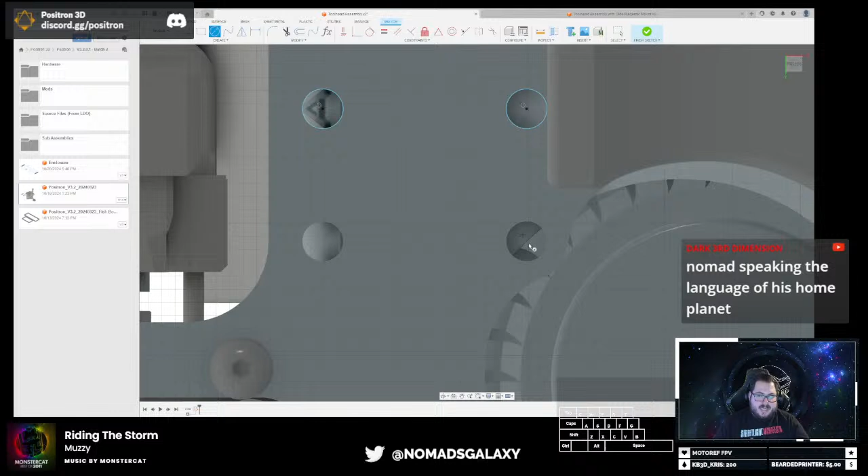Hi, Callie, you came in here screaming. Hello. What? What is it, Callie? I don't know if you have an actual problem or you just want attention. It's one of the two. Always one of the two.

Alright, we're going to make that 5 mil in radial. We'll do the same here.

Now, if we draw a box around the center points of these holes, and then... oh my god, Callie, shush.

2.5 out from there. We should be able to make a box there. There's an easier way to do this. I am not doing this like the actual proper way, but there. Now we've done that. We do the same over here. 2.5, 90. Oh, 180. There we go.

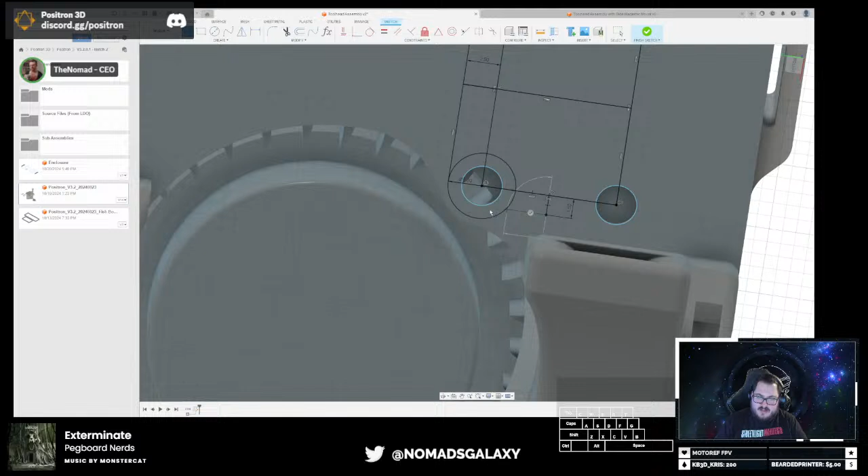Okay, this is... alright, we're gonna do 1.5. Okay, and then 90 there. Oop, I did not do that long enough.

Let's try... nope, okay. So what we'll do instead here is we'll just draw a box from there to there. Again, did I ever say that I was good at Fusion? Because if I did, I was a liar. Alright, so let's get rid of that.

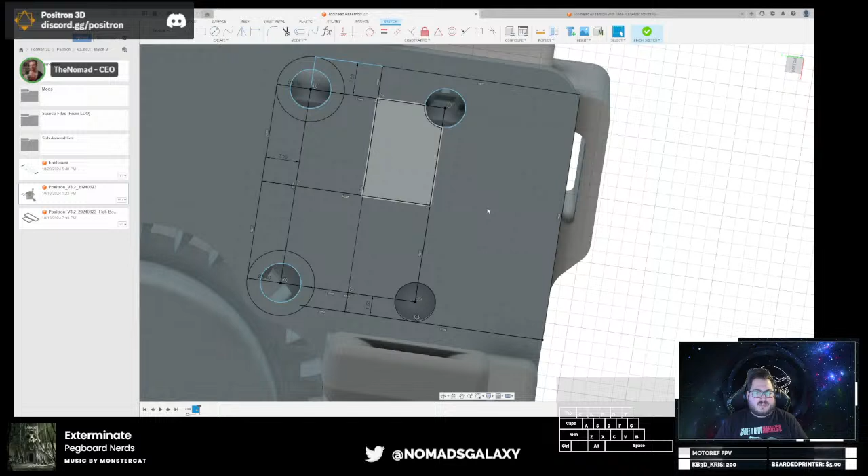Finish sketch. Now we're going to extrude this. Now we want this to be really thin, so we're going to do 0.4, 2-layer thickness. That takes off a decent amount from the screw, but 0.4 should be fine.

Oh, did I just merge that? Oh no, I did not make that a new body. Oh, I did make a new body, never mind. Okay, there we go. Whipped by a bunch of goddamn nerds. To me. Alright.

So let's drag that out here. Yep, so that's going to be 2.5. Join it.

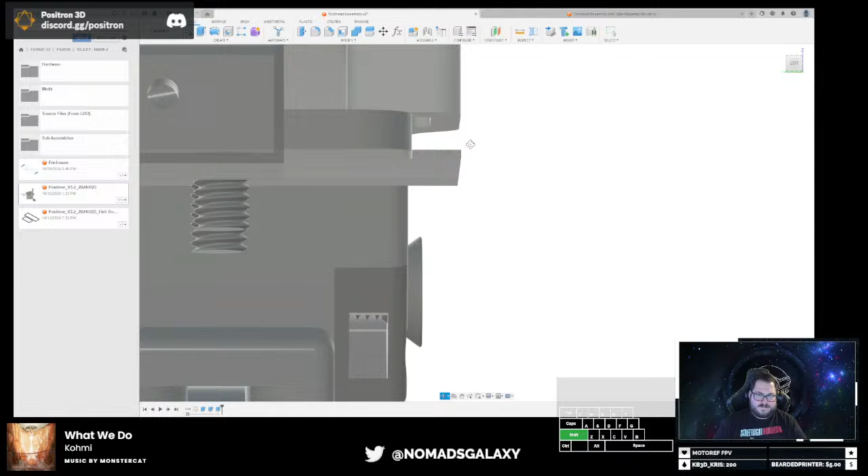So now we have a little shim that just goes underneath that plate there and comes out.

So let's make this a bit thicker. So let's say... let's do 2.5, that should be good. Now we're going to do another sketch here.

All right, I'll go there. Do 2 millimeters. There we go.

Now, what I'm going to do here is just kind of roughly sketch this out. I could do this correctly and actually sketch out the curvature there, but I'm doing this the lazy method. So we're going to extrude that up.

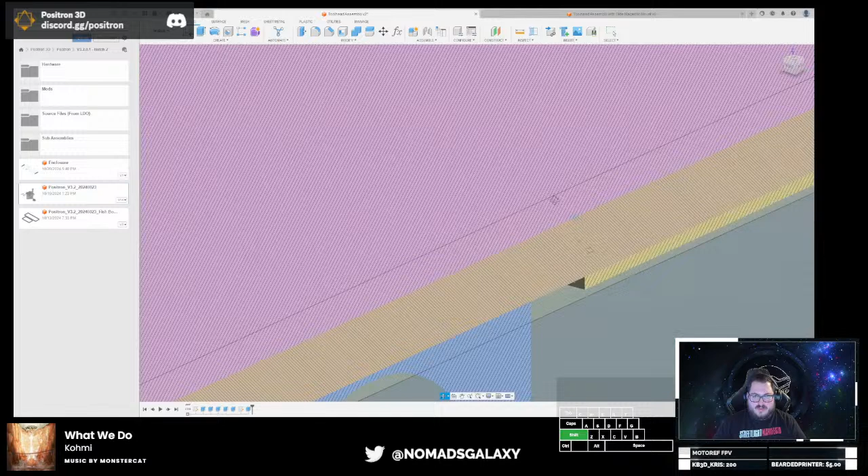And then what we're going to do is section analysis, but we're going to flip this the other way, and pull it back just a tad. Just like that.

Now I can do a fillet. Right there. One right here. One over there. And one right at the end.

Okay, look at it from the top. And it doesn't follow it perfectly, but that's fine. It does just enough to give that a good look there.

Now what we're going to do here, we need to add material to this because this is going to be very thin and very easy to break. So we're going to use that fillet there to just add material. There we go.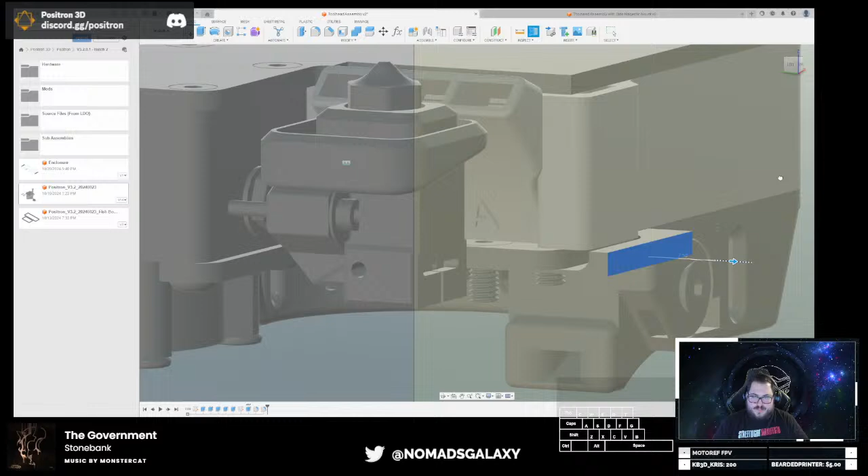I'm feeling pretty decent about that. So if we look at that, it doesn't stick out from the tool head all that far, so this actually works pretty decently for what we want it to.

So what I'm thinking is right here where the most material is, I'm thinking just like a little sled that kind of slides in with a... oh, hold up, our print just finished. Let me go grab that real quick and see how it turned out. Ooh.

So chat, while he's gone, would you guys like to talk about the different kinds of war crimes you've been performing? What? Nothing. God, that sounded exactly like the sound effect we have in Discord from Mandic's video. Don't even think about it. Did you play the sound effect? Oh God, that was exact. Don't even think about it.

Chat, I'm feeling good right now. This looks good.

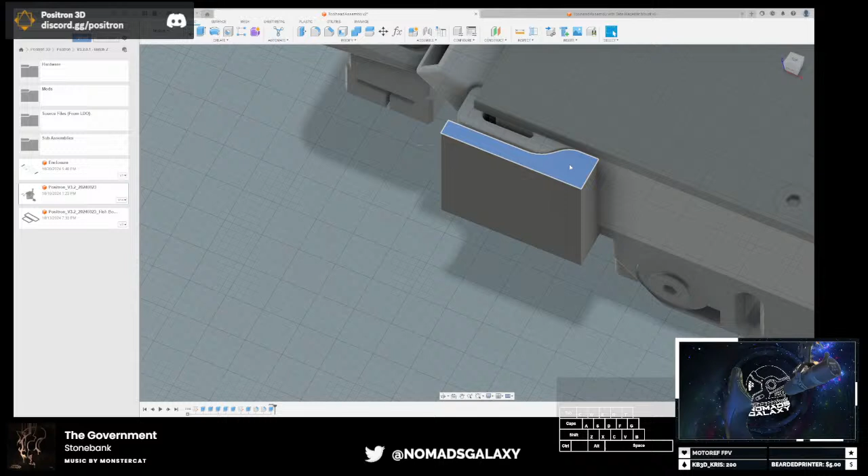Oh no! What? It's transparent! Thank you, Nathan, for subscribing. Chat, it's transparent. See it? That actually looks kind of cool, the back side. That's the back side, that's the front side.

All right, let's charge it. Does it glow? We're about to find out. Hey Google, turn off basement lights.

Do you have any bigger face cam? Chat, it's working.

I would have thought the ASA would have blocked it. Well, it's slightly transparent with a layer this thin.

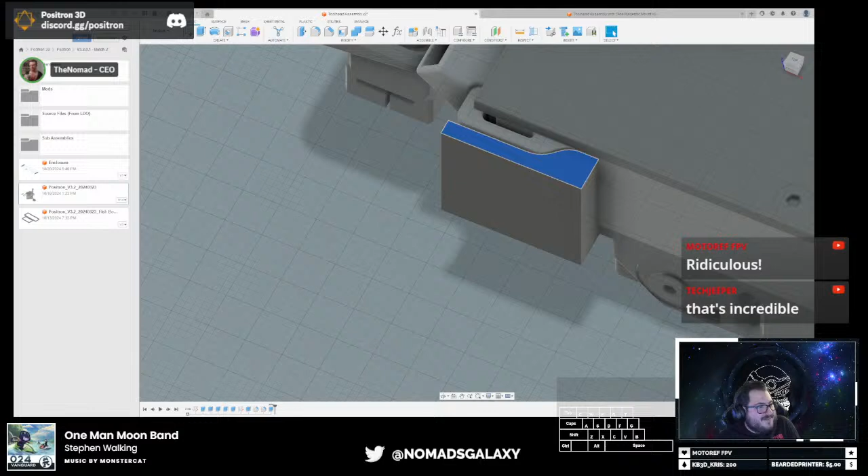Isn't this fun, guys? This is actually pretty fun. I can't believe that actually worked. That's impressive. I was not anticipating that would work as well as it did. That is so cool.

Now I have a tiny dick butt, and I'm so happy I can do this on my XL now. Because like up until I finish that enclosure, this would be near impossible.

Because my X1 won't let me mix materials like this, so it's not happy if I use ABS and ASA. But with this, I can mix the two no problem, and they bond together really well. Like I don't think I can pop that out. So I'm really happy with this.

I hoped they would bond together. They should. So what I might try to do next, instead of what I've done here, is make it 0.4 millimeters. So rather than have it go all the way through like we did here, I might try just to embed the object 0.4 millimeters into the surface, so then it's backed by the darker material, with just enough to be luminescent.

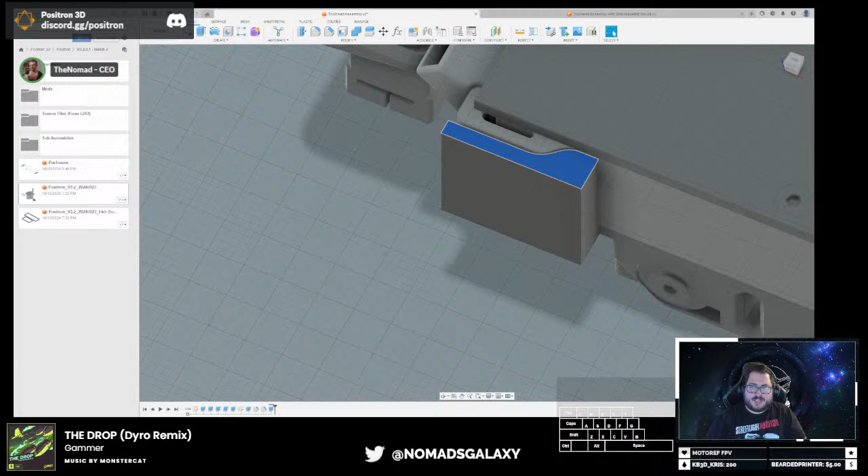But actually, here, let's do this. Let's make some test cubes, because the only way that we're actually going to get any results out of this is if we actually make test cubes.

That is not... there we go, there we go. All right, so we're gonna make a standard test cube here. So we're gonna make it 10 mil by 10 mil, I think that's a good size. And then we're just gonna put a letter, so we're gonna do text.

And then we're gonna make that. I dare you to make the text say, "God wouldn't help me, so I helped myself." That's too much for the little amount of space we're doing.

I'm gonna do an X. An X will let us... Actually no, I'll stick to like an O. No, we'll do N. N would work, we'll do N. Fuck yeah, N for Nathan. No, N for nomad, fuck you.

All right, so we're gonna make this. So we're dealing with 2 millimeter thickness here. Here's what we'll do.

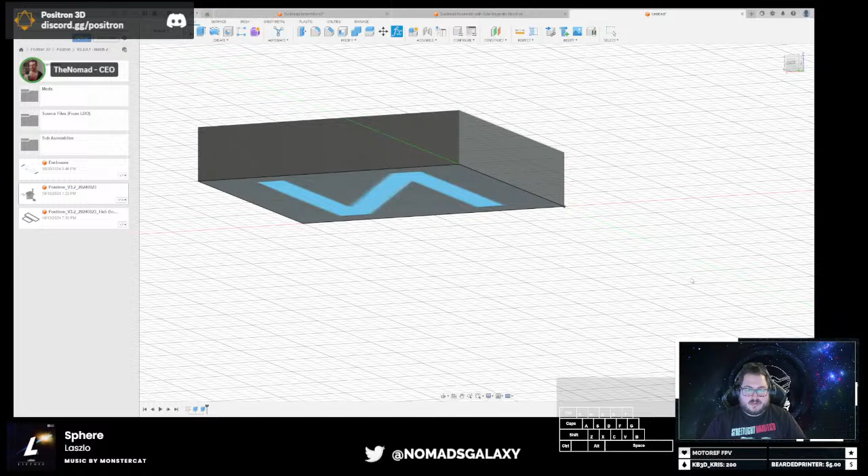So let's get rid of that sketch. We're going to extrude this by 2, minus first layer.

You know, if we end up going with the UV LED idea, we can make it so the actual glow in the dark part is less layers compared to the rest of the print, so more of the UV light would shine through. Because the more layers of glow in the dark we have, the less UV will actually be visible on that top layer. So now, just to make sure I know which side is down, we're going to add a chamfer to these edges. That also will make it easier for me to remove from the bed. We're going to do 2 distance so that I can make it a steeper chamfer, just to make it easier to print. There we go.

Oh shoot, did I really... new body.

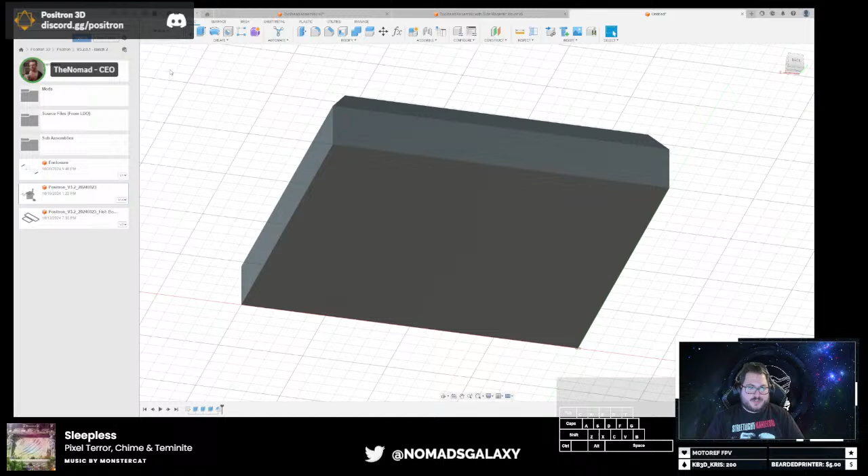Going to go to render real quick. And we are going to change the color of that inner piece so that we can see it better. There we go. Boom.

All right, this is going to be 0.2 mil, 0D. All right, now we are going to - so embed depth is going to be 0.2, so 1 layer. Actually no, we're going to do this in...

Yeah, we'll do this in increments of 0.4, just because otherwise we're going to be here forever. So we're going to do minus embed depth. How much more? Okay, we still have 1.4, so that will work fine.

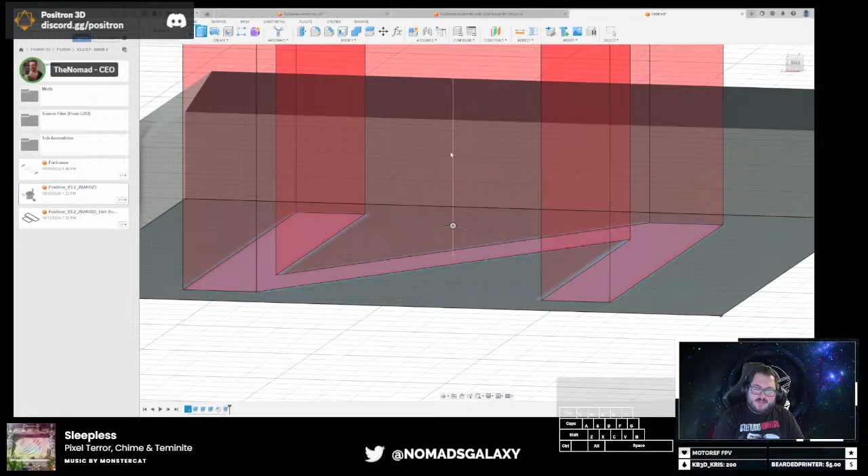And then we're going to do embed depth. Join - nope, that's the wrong thing. Okay, so we're going to do embed depth, but we are going to just do like minus 0.01.

There we go. So now, where's body 2? What? What happened? What? It's just a solid block. There's body 2, there's body 1. What happened? What? Oh, hold on, there we go. Okay, so they're there - that was weird.

Okay, so this is 0.4 depth, so we're going to do the same thing. So save as mesh, export. And then we're going to say 0.4 depth. And all we have to do is go in here, make that 0.8. Okay, now if we do a section analysis - there we go, that's working.

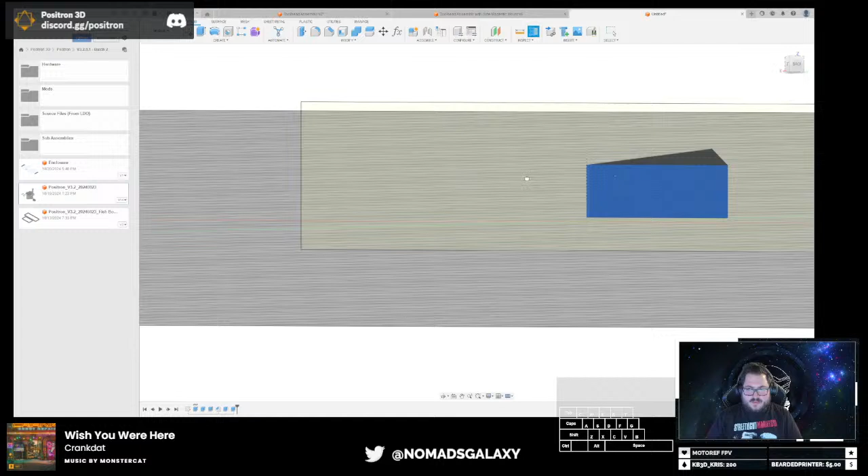Okay, that's 12 millimeters, not 1.2. Oh no, I did do 1.2. Never mind. Oh god, that's not what I wanted.

Why is he doing that? Don't do that.

Why does nobody make a power strip that doesn't have a switch but it's operated by a key? That'd be perfect. Okay.

Alright, save this as a mesh. And 1.2. And then the next one is 1.6. Yep, okay, so that's the thinnest possible.

Okay, so now we do that again. So we set that to 0. Ooh, wait, it didn't like that. Alright, just for the sake of this, we'll just set it to 0.01. It'll do the same job. Okay, and then this we're going to set to 0.4.

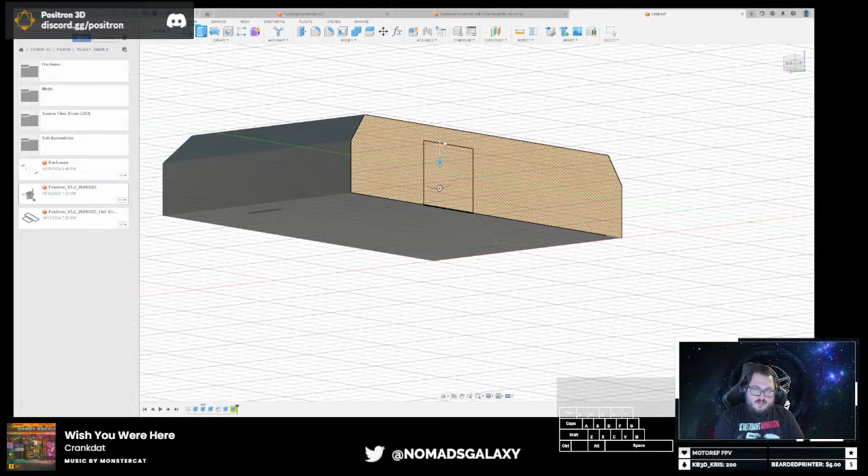Nope. Okay, looks like I have to do some manual work here because I made a mistake. First layer, what if I did divide by 2? Minus 0.01? Oh, there we go. Okay, save as mesh. So now 0.40.

Isn't science fun, kids? Well, looks like I'm calling the sheriff again. Oh boy, fun. The first cop to arrive on scene took my ID from me to run it and never gave it back to me, and I just now noticed. Oh, fun. Yeah, what's even more fun is if he went back to the station after that, he has about an hour and a half drive back out to my house to give it to me. Rip. Because fun fact, everybody, if a cop walks off with your ID and they can't return it to you within a timely manner, it actually turns into a criminal charge. For who? It's not even you that gets the press, it's the state. Well then. So I don't have any say in, oh, it was a mistake. No charges. That's the state looking at it like, oh, hey, you stole.

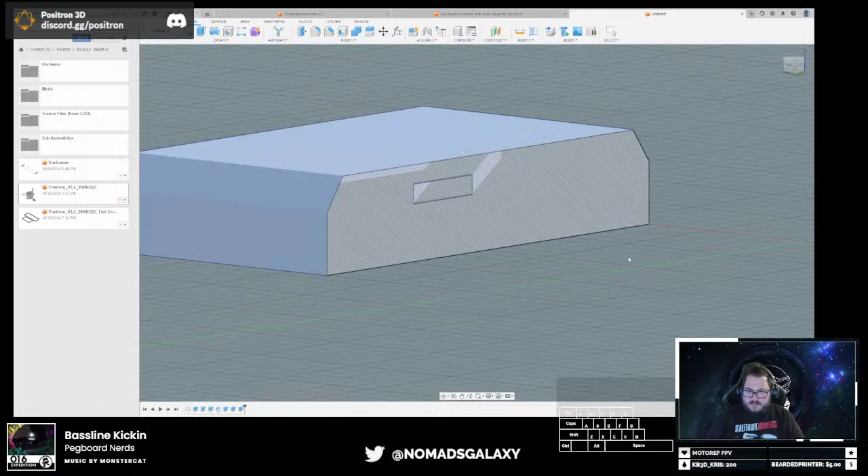And I don't think I can go to 1.6. Nope, okay. So 0.01, and then we're going to 0.6. 0.6 mil, 0 depth. Save. 0.4 depth. Don't know why that changed the top part.

That's weird. Okay, well, let me look at that. Nope. Okay. So this is going to be 0.6 with a 0.4 depth.

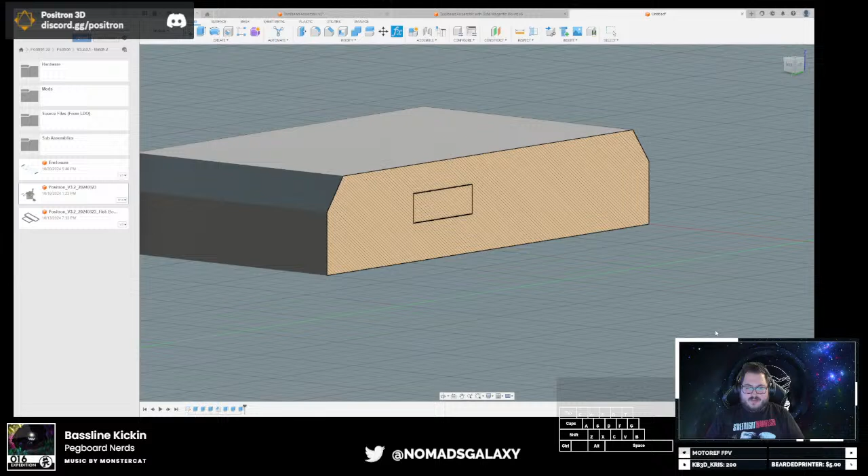What are you making? We're doing a test. Alright, so now we go to 0.8. We're doing essentially a TD test on 2 materials.

And then what I'll do is, in the slicer, I'll add text to identify what's what. Because I just realized I didn't do that, and that was probably really dumb of me.

Alright, and this will be the last test. Because I don't think after 3 layers it'll still be visible. If it is, then I will do this test even further. Actually, it's not that many more models, so why not? We'll do that.

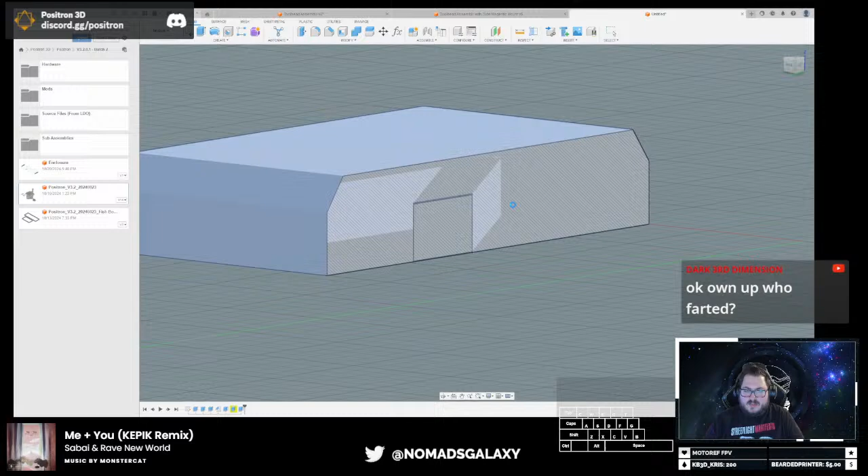0.01 and then 0.8. Okay. So 0.8, depth of 0. 0.8, 0.4. 0.8, 0.8.

Let's see if I can even do 1.2. I don't think I can. Nope. Okay, so we're done. Okay.

Who's pinging me? Don't know. Okay, alright, so let's go back to Orca Slicer here. Okay, so I'm just going to do display capture because I'm lazy.

Alright, we got a lot here. So first off is 0.2 at 0. Oh god, this is tiny. Oh, that is not... Oh, right, I need to